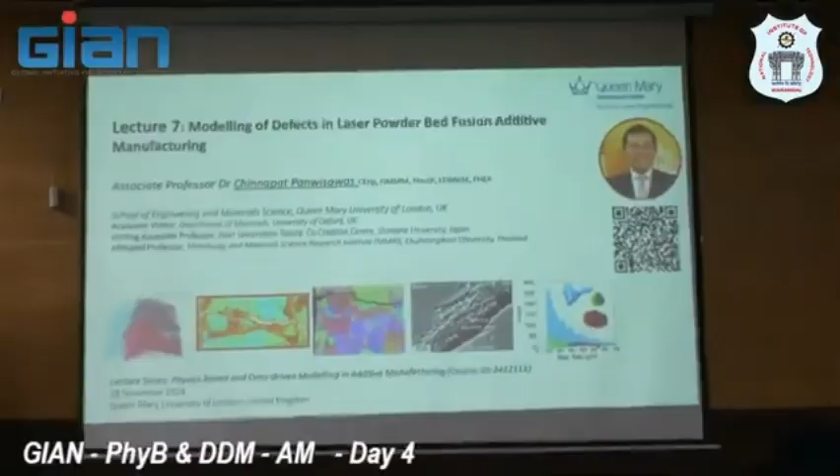Yes, we have about 3 minutes, so wait for about 3 more minutes before we start the first session. I hope everyone is not too exhausted about yesterday's trip. Thank you very much, Professor Kumar, for the arrangement and everything, it was very enjoyable. This session on your schedule looks the same as another, but it's actually not. We are talking about this topic first before a specific example on the nickel-based superalloy.

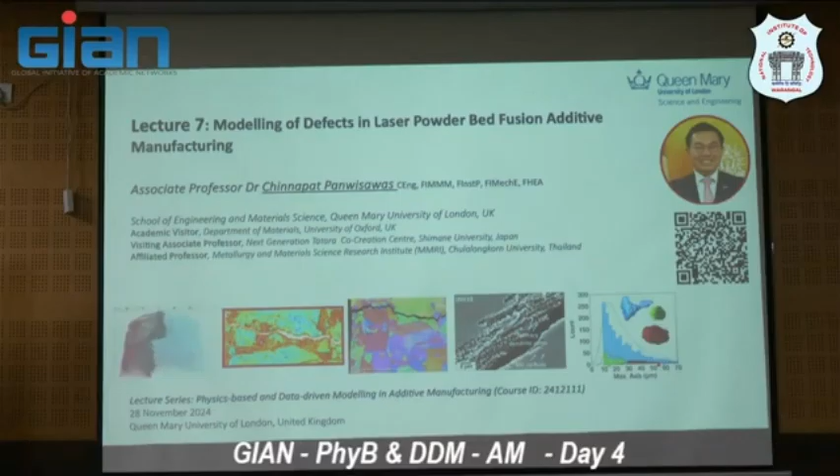Standing here. Is that in the frame, right? Okay. Yes. Okay.

I think we can leave it until the question answer session, because another slide is very metallurgy actually. I may need to spend some time, or I will be very quick, so we have some long time for discussion. Yes, I think it's about time to start.

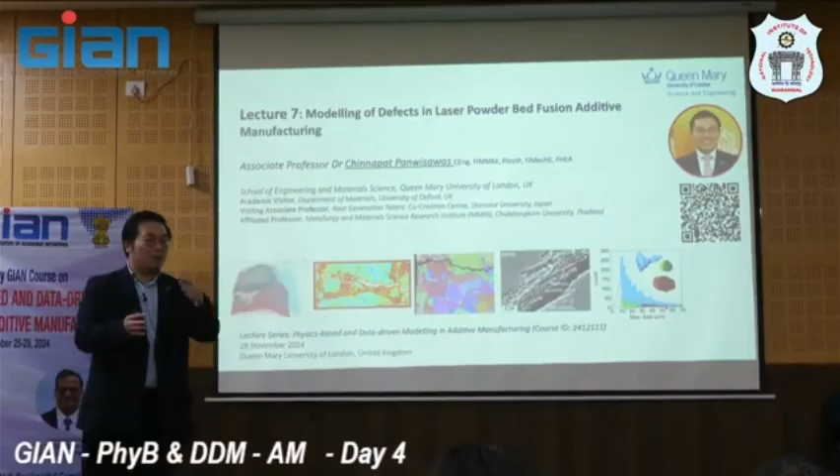Just to let you know, on your schedule you have a similar topic for these two morning sessions, but there is actually a difference, because the intention is that we are approaching the end of this short course now.

Before we go to the last two topics, which is about physics-based simulation for one of the defects we call non-homogeneity in additive, in the next session we want to give you an overview of all the defects formed in additive. The last one will be the example on physics-based simulation, and the session after, tomorrow morning, will be about how we can use data-driven or machine learning approaches to design a new alloy, a success case we did over many years on nickel-based superalloy.

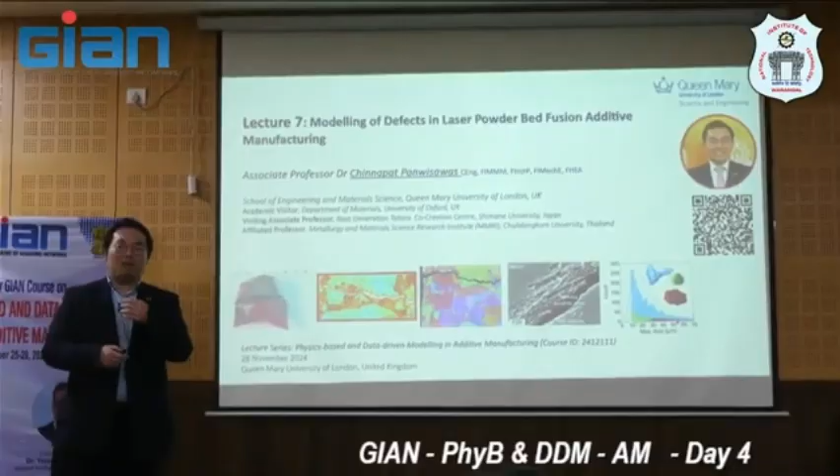So it will heavily focus on that kind of material I'm working on. Today is about defect formation and defect type in additive manufacturing. As you may know, defects are always a problem for engineers, metallurgists, and everyone. No one wants defects on their printed part, but unfortunately nature is not that simple. You need to deal with it somehow, and most importantly, as an engineer or scientist, we need to understand why it happens and how we can avoid it if at all possible.

As you know, this is the very first slide I presented, that we know now about the processing, microstructure, and mechanical property, and defects which can happen across this entire PSP pathway, what we call property-structure-processing-structure-property pathway that we are going through. This is smaller scale, this is bigger, this is a crack across the build, which we will talk more about.

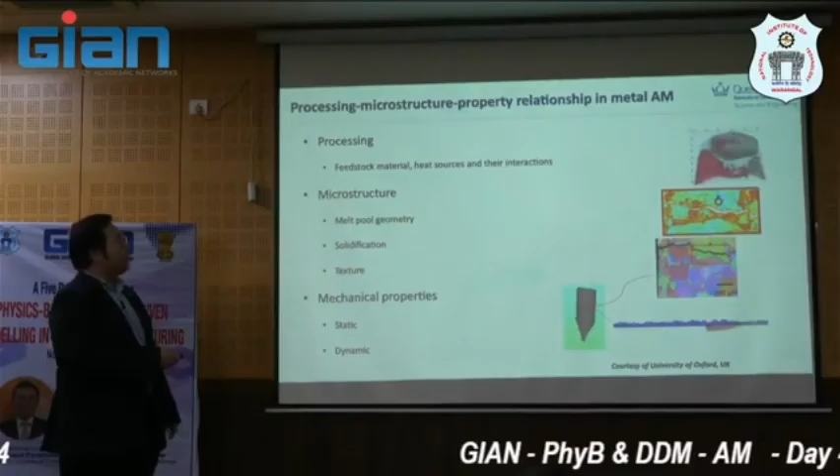And then you see when we do the EBSD map here, you see the strain which is not homogeneous anymore. This is what we found after we did some atom probe tomography. But anyway, this is the defect thing we are trying to talk about today.

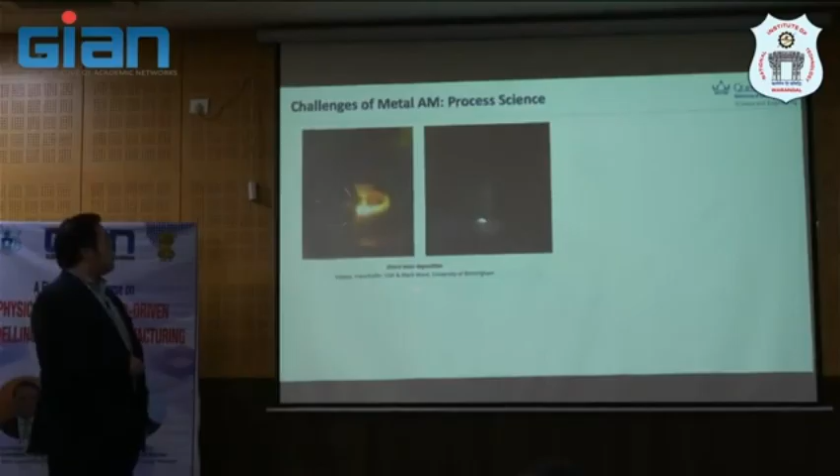Just to remind again, in order to successfully print something in additive, we understand from the root cause of that, the laser-matter interaction with the defect. This is during processing, not solidified yet, and you see a lot of things going on here.

I'll try to bring you to the chart that shows easily what happened here. It's so dynamic, you see the plume coming out and sometimes spattering and so on. How can we predict that? That is another question.

This one is probably similar in manner, you see some plume coming out as well, but probably not as strong as in this case. And this is a bigger length scale.

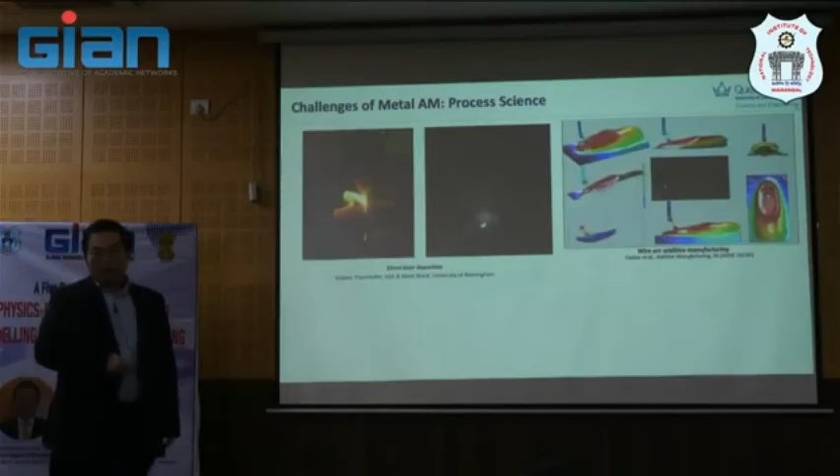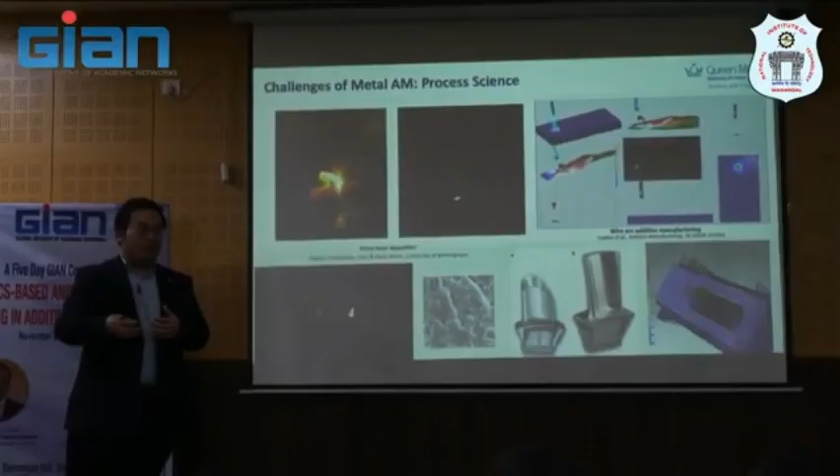So the question is, how can we systematically classify these defects and try to understand them in a single, common language? There is a good paper that reviews what is actually multi-scale defect in powder-bed fusion additively manufactured metal and alloy. This is a classification of multi-scale defects in powder-bed fusion, LPBF if you like, though it doesn't need to be LPBF, it can be electron beam powder bed as well. You will see from here that they classify defects into three categories.

One defect type is actually related to geometry, which is part distortion. This is a classic kind of cantilever feature. It's similar to a case study of AM Bench at a NIST National Lab, which will be a bridge structure with different sizes of fins, showing delamination related to geometry because of the distortion or residual stress build up in the part.

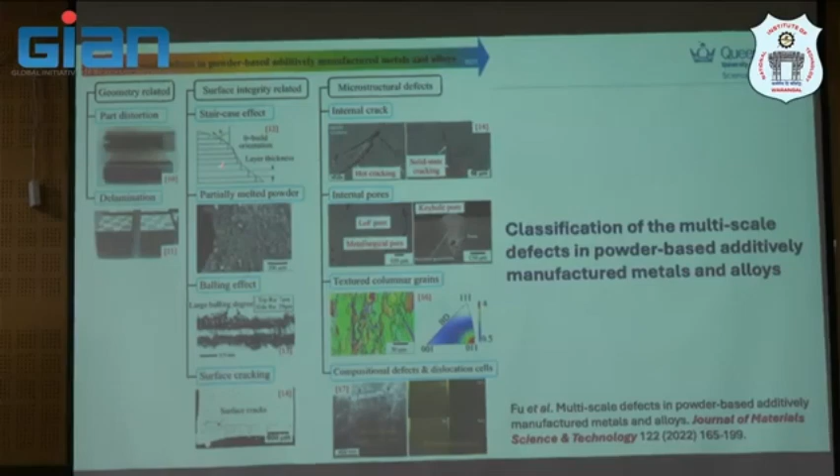Another defect type is surface integrity related, kind of a staircase effect, probably based on geometry as well, but focused more on the surface level, which relates to layer thickness. Sometimes due to melting you get partially melted particle or powder, and as melting progresses, you get a balling effect, which is a surface tension kind of phenomenon related to thermofluid interaction.

And this is surface cracking. This is one of our works published in ACTA 2021, and this is from the same work here. So we talk about hot cracking. I will tell you a little bit more about these cases, that cracking is not just...

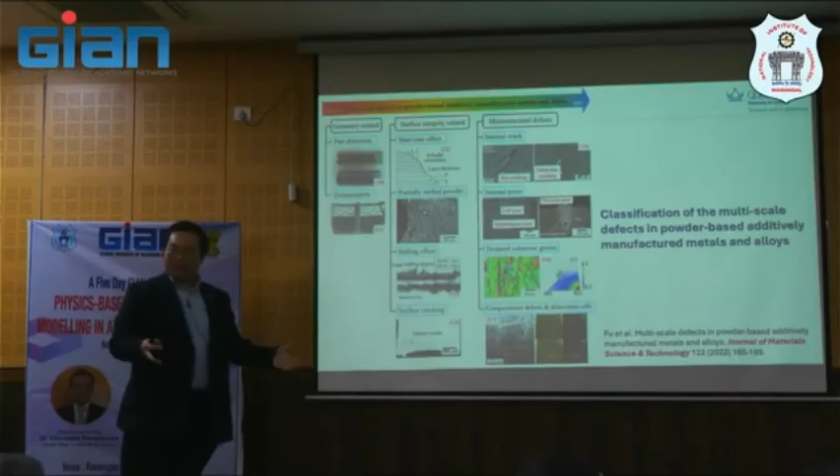Here as a microstructure defect, porosity is also classified in a number of ways - lack of fusion, voids, process-induced porosity, and also coming from pore trapping during powder production. Texture and columnar grains are defined as defects since textured material is not preferred in the process. Last but not least, there's compositional defects, which I'll give an example of next lecture, and dislocation cells called cellular structure in additive manufacturing.

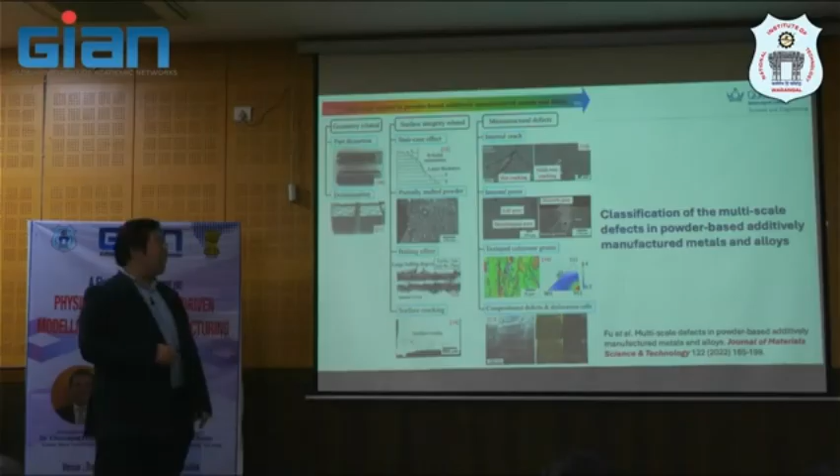I hope this summarizes what we discussed in the past few days. So this is the geometry-related defect, more detail or example here. Like this bridge structure at numbers 1, 2, 3, 4, you see some bending of the part. If you look closely, there will be differences in terms of the size of the small part here, and then there is some delamination.

As you remember from one simulation we did, if you print something long enough, you introduce some intrinsic heat treatment, which allows a secondary phase to grow. That concentration may lead to delamination sometimes because the stress is not continuous throughout the sample, and this may relate to distortion as well.

This is a bigger part that may induce geometry-related defects. People are trying to correct, study, or systematically investigate how feature thickness contributes to geometrical error, as I showed in the last two slides, comparing the CAD model and the printed model to see the mismatch. The error is actually quite significant, up to 35% mismatch or deviation from the geometry we want to print.

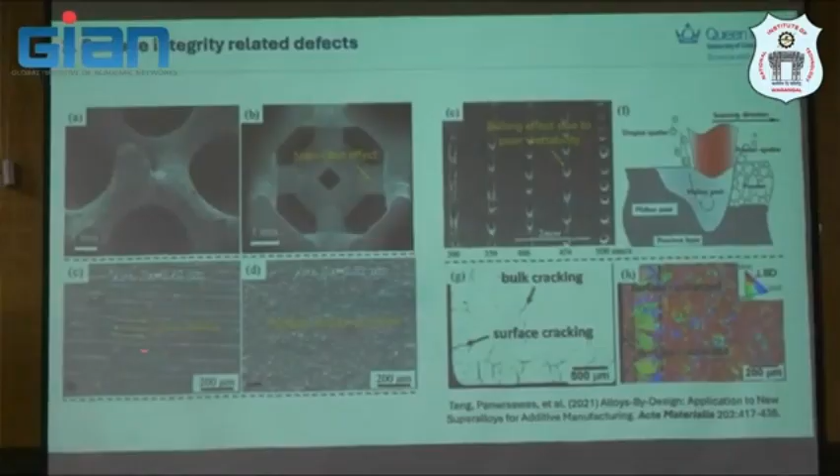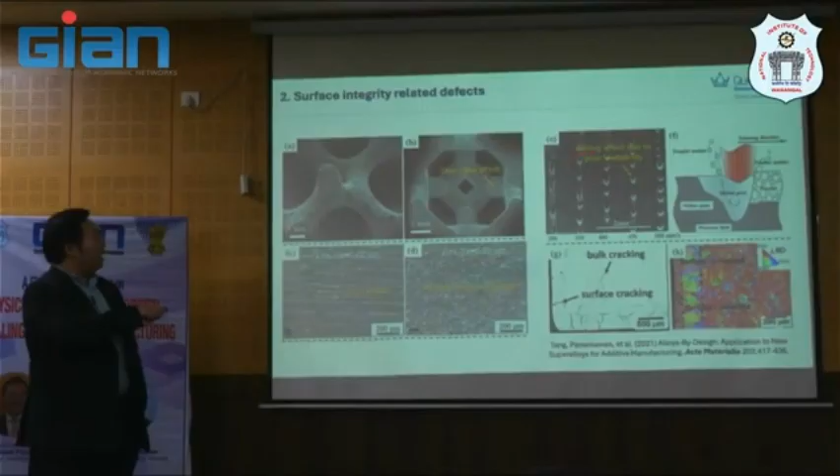The surface roughness may contribute from the quality of the powder as well as the way you print it, in terms of optimized process conditions like laser scan speed and the power used for this process. Partially melted particle or powder is also another defect which may pose challenges, and later this may form porosity. All of these, and almost everything here, originates during the laser-matter interaction.

You see the balling effect is about poor wettability related to surface tension and probably viscosity of the metal at the liquid stage that you print. This is an attempt to summarize it, but it's not very inclusive like my previous diagram.

Definitely this will be another challenge, because in terms of surface integrity it's not just porosity, but cracking at different locations. At the edge, it's due to rapid cooling, which is different from in the bulk.

This sample is only 10 millimeters thick. It's not very big, but there's still some micro crack and then macro cracking here. I think this is related to the scanning pattern we use, because at the edge and in the middle we change the way we print it. So that is something to improve.

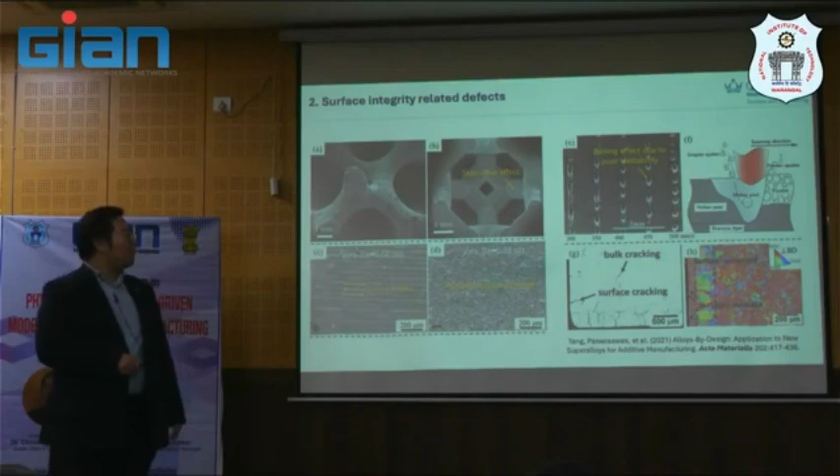But the point I'll show later is actually related to the composition of the material, which probably relates to this effect as well. There's surface cracking that connects from the bulk to the surface, and the microstructure in the middle and at the edge are different - it looks like the growth rate here is more epitaxial, or a columnar grain, which we'll talk about more later. So this is surface integrity defect.

In terms of microstructure defect, there are so many microstructures that link to composition and to the processing as well. But again, this is the internal crack - basically a solid mechanics kind of effect, solidification cracking.

Why do we say solidification cracking? Because there's evidence of small dendrites. Be aware this scale is just half a micron, so it's so thin you probably wouldn't notice it as a dendrite - only primary arms are actually taking place here. You see the crack feature, and then zoom in using very high resolution SEM, and you'll see this kind of dendritic structure.

But it's not just solidification cracking. As I said, there will be other types like liquation cracking, and carbide cracking as well - something we want to talk about more in detail. Then porosity, again classified as internal pores, probably acts as a stress concentrator, inducing some plasticity in this zone, promoting crack penetration. This is another scale of solidification cracking, at the melt pool scale.

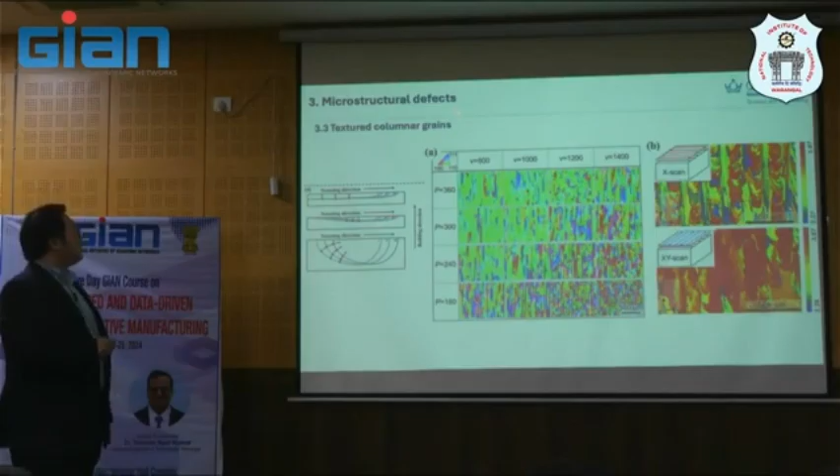Everything originates from here. So the next one is the microstructure defect: texture, columnar grains - one of the microstructure defects. You'll see this diagram clearly when you use P and V. The microstructure changes quite significantly under certain conditions - let's compare here and here.

You will see they are so different in microstructure, and this also contributes to the different scanning pattern that you use. If you use only X scan here, you get this microstructure.

But if you use X and Y, kind of alternated layer, X, Y, X, Y, this will lead to a different, more probably not preferable microstructure. We want more equiaxed, small, round shaped microstructure that we need.

As I said, this is related to the thermal model as well. If you scan like this, microstructure will grow this way, so we can control the directional growth of the material. But if you scan like this, the microstructure may start to bend a little bit.

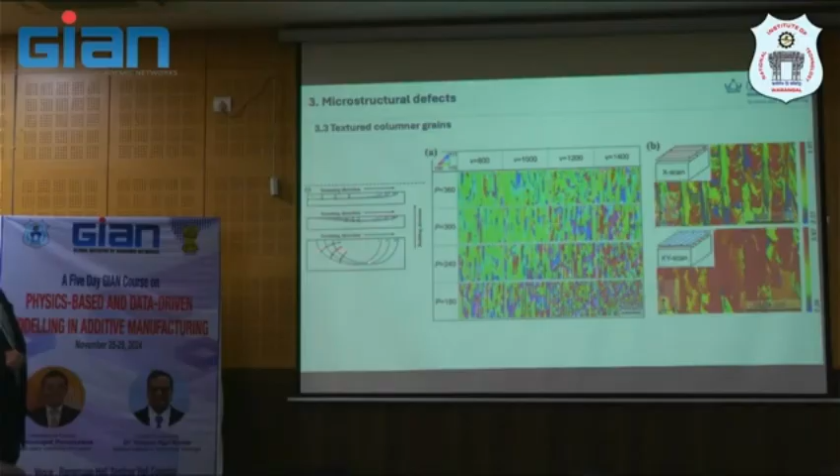But if your scan direction makes this melt pool very hemisphere-like, the grain will grow in this direction. That's how you see some feature like this in the melt pool, for example.

So we will talk a little bit more. I think this one is probably not talked about a lot these days, but people start to study compositional defects. What I meant by that is you may get some segregation, probably heavily during the printing process, and this is not easily detected, and also needs advanced characterization to look at.

This is a cellular structure of LPBF stainless steel 316L, a commonly used steel for 3D printing. You see the suggested microsegregation in overlap to the dislocation cell.

Sorry, this will go deep into metallurgy, but it's quite interesting science where we can look at grain boundary. This actually decorates at that location, and this is because of the formation of dislocation cells at that condition.

This is trying to calculate this at the conditions of selective laser melting and direct energy deposition in one-dimensional, two-dimensional, and three-dimensional structures. You will see some characteristics of DED and LPBF are a bit different, due to LPBF scanning in a very small, precise region rather than DED's large melt pool.

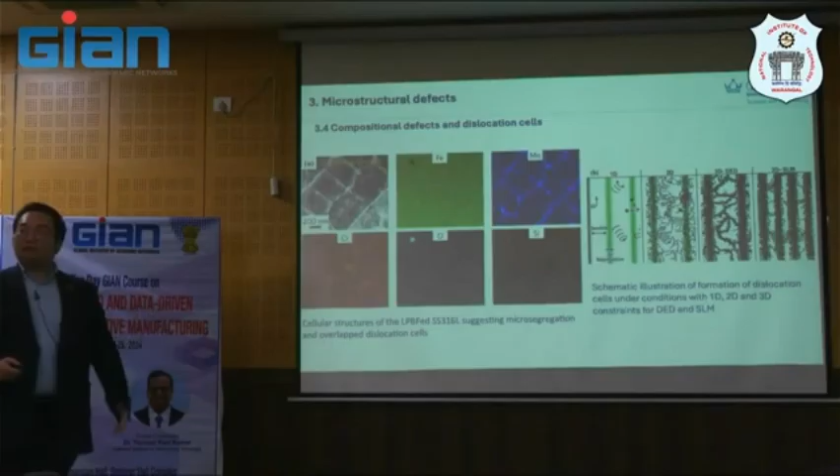Or even with LPBF laser and EBPBF, which is electron beam, you get different dislocation cell or microstructure as well. We haven't touched much onto that, this is getting into metallurgy now, but I just wanted to mention it. So how can we detect and also predict it?

This is another question for the talk today. So the defect here, you see detection of this. Distortion actually is not easy, and this is related to the length scale.

If you like, this is a large length scale, component length scale. It's related to solid mechanics. It's related to mechanical engineers like yourself to help simulate it at the part scale.

But actually, using homogenization that does not contain some microstructure information may not correctly capture what happened during the 3D printing process, because the case in 3D printing is not homogeneous across the structure.

You need to introduce some way, somehow a computational approach like statistical finite element calculation rather than more deterministic. You need to introduce some framework that they call statistical FEM.

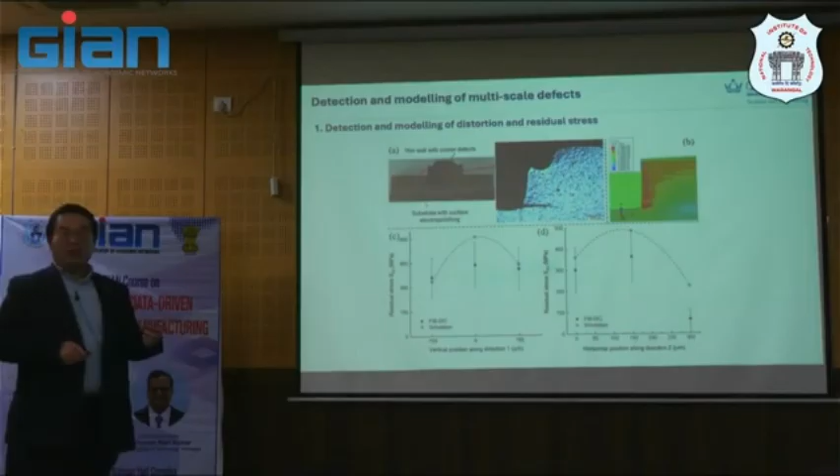Another one they're looking at is a more rapid type from numerical, computational mechanics - it's meshless, so you don't need to use mesh and then try to predict this part. Again, it's not my area, but you're welcome to study more in this topic, which is interesting as well.

So you will see the residual stress in the principal direction as sigma or S33 at different directions or conditions. That means at different locations, you get different residual stress profiles, which make things even more complicated. But this is life, so basically complicated.

And then next is predicted or detection - the detection of the surface roughness. If your printed sample is in micro LPBF, and then this is for implant, for example, or thin film, you may use AFM, which is atomic force microscope, to detect or measure it.

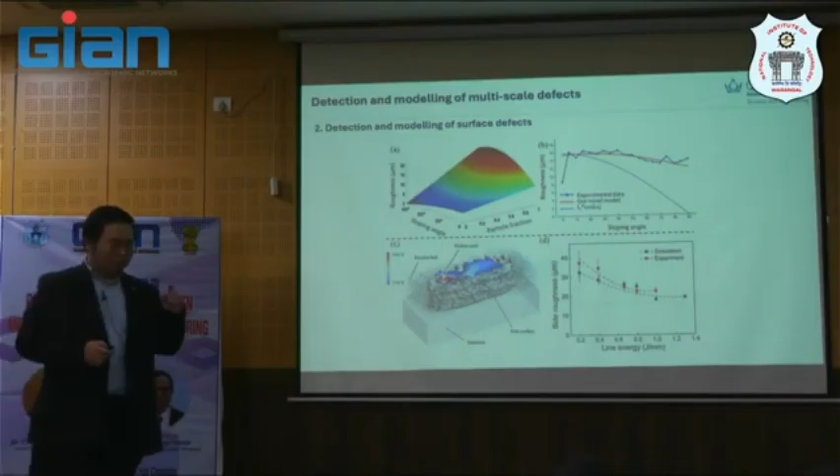Or if it's large scale, it may be some kind of laser measurement. Previously my colleague that I collaborate with also used some microscope to roughly estimate. They measured RA quite well actually, but I have to go back to see the information on how they did it. Anyway, this is some detection of the surface roughness, and the model also can try to predict what happened.

In this case, some of you asked me before about how can we predict the side surface here, and some model actually has been done in a multi-layer fashion, but you will see here is about only 5 layers, but they can already capture the trend, at least qualitatively.

I think this is quite good agreement with experimentally measured roughness here, even with very line energy density. But anyway, that means things need to be improved a little bit more.

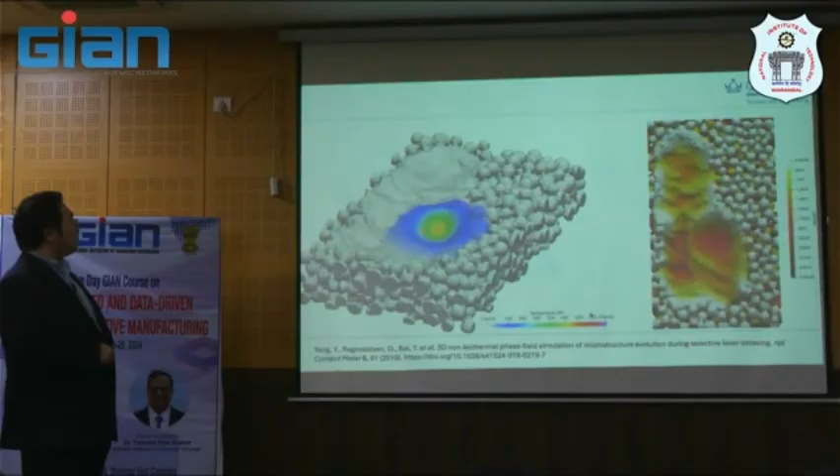Another example is related to this evolution, but this isn't really intended to be melting, it's just a sintered part. So you see, if you scan these three tracks and try to predict the evolution of the microstructure in terms of porosity, this is what you get.

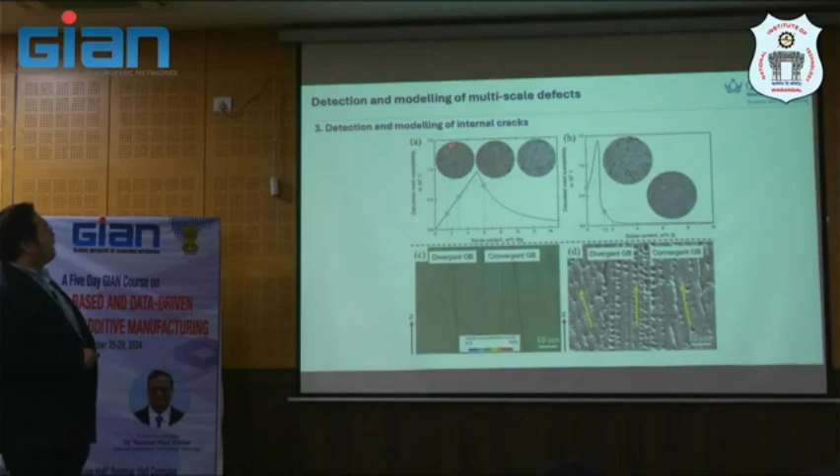Next is about internal crack, again related more to the solidification feature. The cracking actually depends on this calculated crack susceptibility. This calculation depends on the solute content, meaning it depends on the elemental profile within your metallic sample, since we're talking about metal. Solute content at different conditions will vary as well, and this leads to different structure and defects.

Again, this you can do in terms of simulation, as Hong Hao showed very well yesterday, predicting the dendritic growth and segregation profile. I can say it's not an easy task, but it gives you insight that may not be easy to measure experimentally.

Next is related to what we talked about in the past few days - the microstructure. People try to predict or model this grain structure a lot. This is work from Professor Wentao Yan at NUS, published in NPJ Computational Materials. You see multi-layer deposition and capture of the columnar growth here.

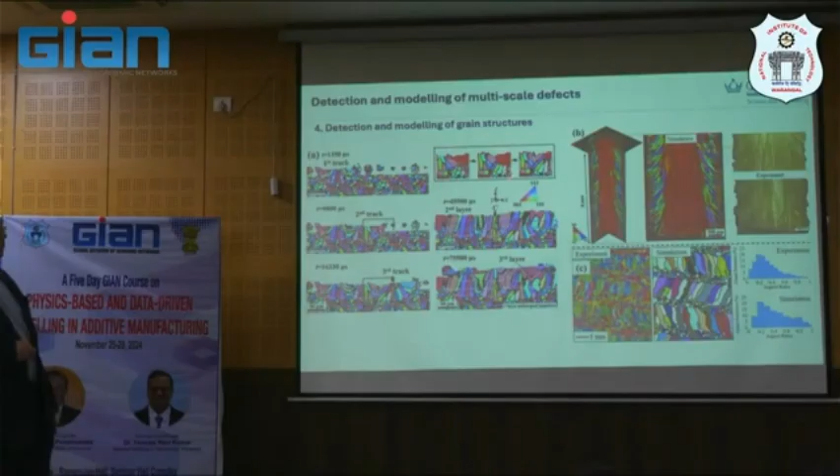At the same time, if I'm not mistaken, this is from another group in Germany. You'll see more directional growth here. Even though this isn't single crystal yet, this may be from electron beam melting, and the experiment and simulation are in quite good agreement.

Or a very traditional kind of microstructure that you'd see at the beginning of AM research in metals. You'll see bands of equiaxed and columnar structure. I think this is due to the melt pool, which wasn't very well understood at that time, leading to this kind of phenomenon.

I mean, a zigzag pattern, if you like. Some structures are very zigzag, and that's why you see quite beautiful microstructure. I'm not sure if it's usable or not, but it's this beautiful structure that can be created by AM.

All in all, what I want to say from this kind of work is about the statistics you extract and then try to predict. I think this is an important message - whether or not you can generate enough statistics that capture the characteristic of the process.

In this case, they try to extract the grain size profile, the grain size distribution, the grain shape - one means near-equiaxed, and if you go to zero, it's more columnar. So this is a distribution here.

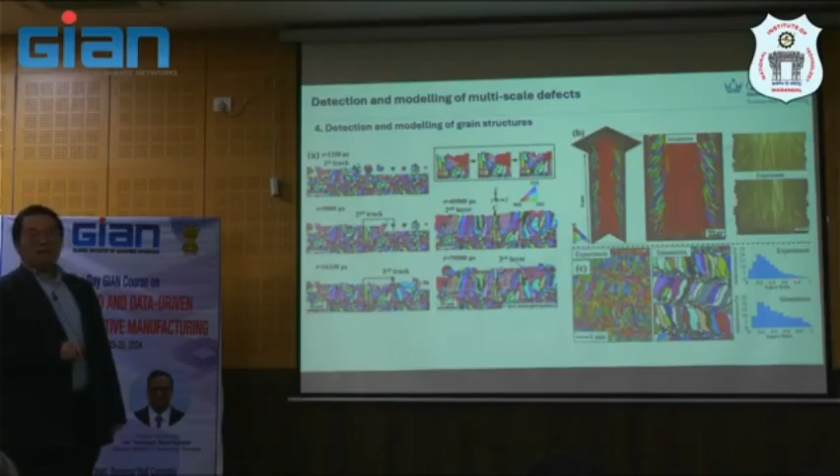This is more columnar grain, which is actually the same as what's observed experimentally. So simulation and experiment probably tell similar things. It's quite good agreement that they can predict the distribution or statistics of the microstructure here.

Next is about how we can model microsegregation, which we showed a lot yesterday on the dendritic growth and segregation profile. This is not artifact - it's real, induced by the process, and we'll have an insightful example in the metallurgy of nickel-based superalloy in the next lecture.

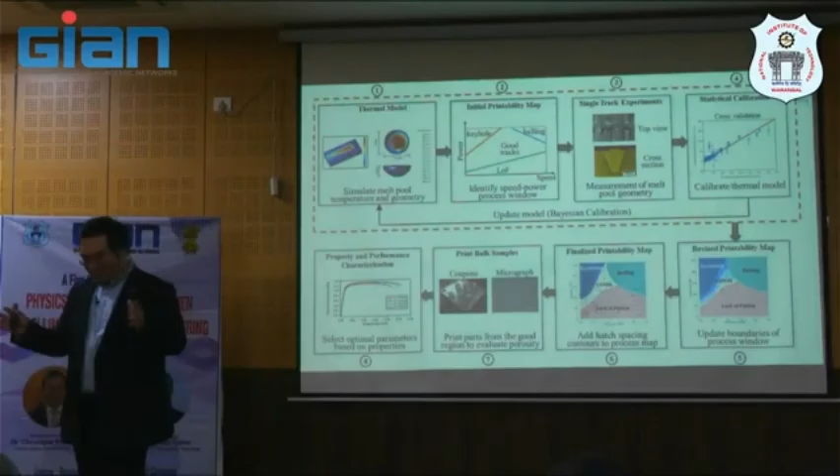I mean, under fatigue, some group in the US has been looking at this very thoroughly, I think, in this dislocation cell for additive manufacturing. Yeah, this is just to summarize the first class about classification of defects that we are looking at.

From the thermal model, you'll see there's some calibration, meaning this may be a framework to reduce the defect. So we start from the melt pool geometry, the printability map we showed previously, and then link to the experiment, statistical calibration. This component is important because this information will go into training the model. We want to extract statistics, train it back, and then hope to revise and finalize the process map, print something, and improve the performance of the material. So in this cycle, we need not only a computational framework but also experimental effort to make this kind of closed loop control happen.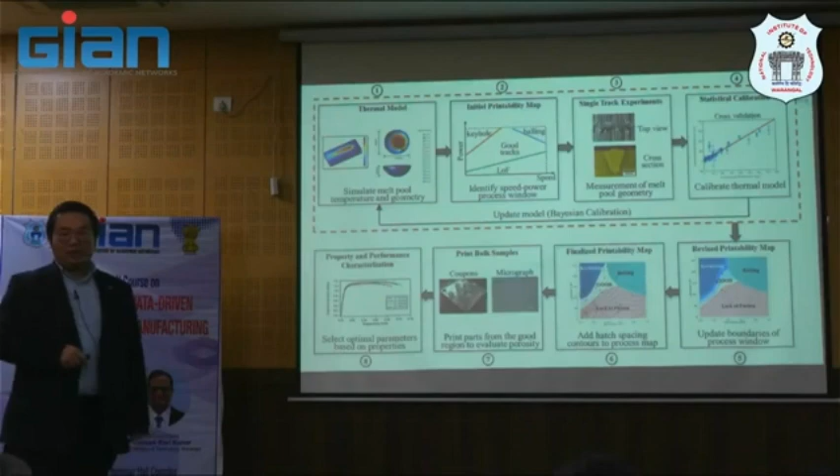So I think that is pretty much the aim or the goal for every company, university, research group, and everyone, I believe.

First, the case I want to show you, why I put data-driven first, is because this will use some kind of data-driven framework to classify the defects in additive manufacturing material as well. This was published a few years ago in Nature Communications, on extraction of defect classification in metal additive manufacturing. They use titanium 6-4 to classify here.

They use an automated XCT. If I remember correctly, there are about 3,000 or 4,000 samples that they classify. This gives you statistics from this feature. There are three important features to notice.

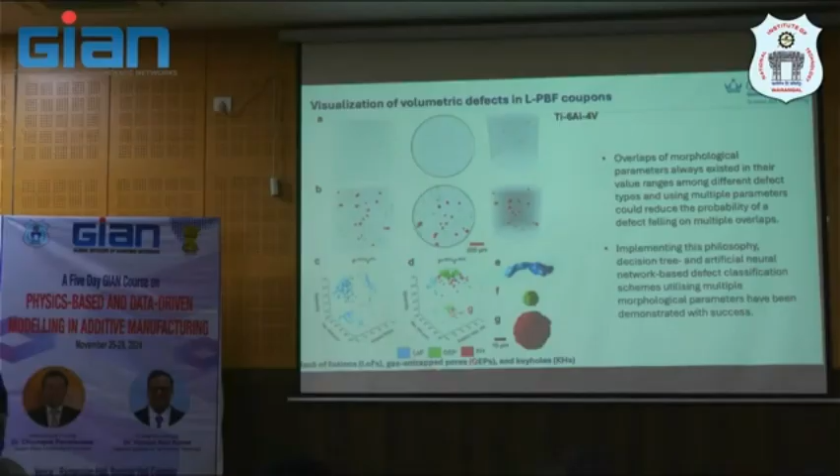The first one is lack of fusion, which appears elongated, from the XCT. Then there's gas entrapment porosity, which is smaller pores, possibly from atomization, small pores in the powder. The next one is keyhole or process-induced porosity, bigger size. We're talking sizes of about 10 microns up to 20, 30 microns.

Then they try to classify and map, because from the aspect ratio you can basically classify the type of porosity. On the color code, rounded small pores are green, big size is red. Green means probably okay, not too harmful, but red is very harmful, too big. The elongated type is somewhere in between, with some overlapping in the morphology parameters, because sometimes you cannot cluster this very well.

But what they did is this: if you look at different samples, this is a distribution you may get from the classification. You see the dominant porosity is actually lack of fusion, in blue and light blue. Keyhole porosity is quite minimal in the samples they investigated, across 9 samples. Then there's an intermediate amount, which is gas entrapment porosity.

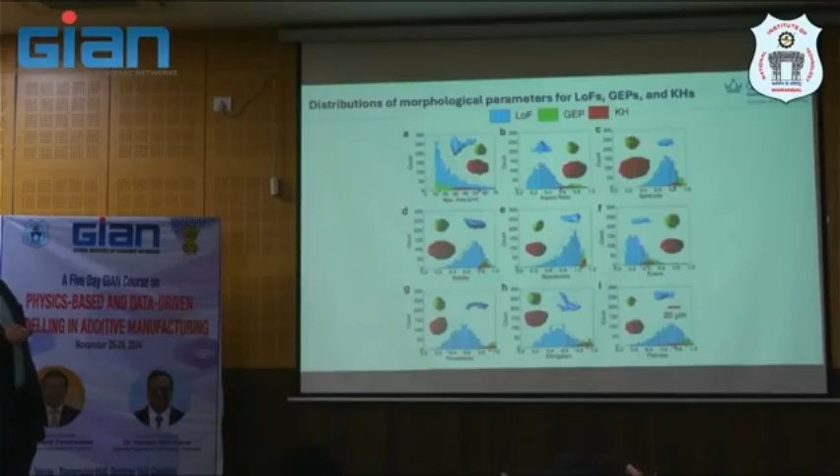So this paper is quite interesting and shows a good way to do data-driven analysis with data from XCT, which is experimental. It's heavily coupled between experiment and coding. Then what they do later is rank the morphology parameters to understand the extent of overlap between them.

Sphericity, which is about the shape factor, sparseness, extent, solidity, aspect ratio, elongation — these are the geometry factors that they are looking at.

So basically talking about the porosity only: what is the overlap between gas trap porosity and keyhole, gas trap porosity and lack of fusion, lack of fusion and keyhole. There will be some overlapping, but this is something they try to rank in a pairwise manner to understand the overlapping percentage between each pair of porosity. I think this is a good and quite clever statistical approach they use to extract statistics for this titanium 6-4 process.

So later, it's quite impressive again — they implement a decision tree for defect classification, and you'll see they achieve about 98.8% accuracy on the test data. That's based on, if I remember correctly, thousands of data points — about 3,000 data or CT scans that they used.

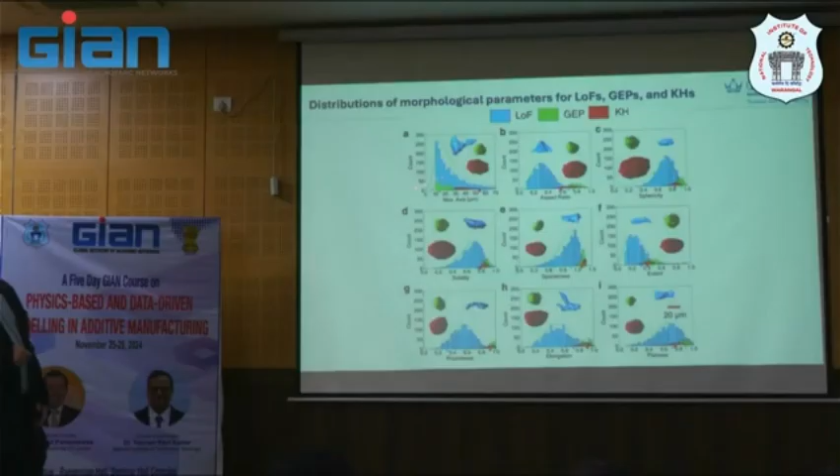But I don't think we can actually remove every porosity from your part, it's about understanding. You may not prefer this porosity profile for sure, but one with a very minimum kind of distribution, maximum frequency here, minimum frequency here, may be acceptable for the application we need. So I think this is quite a clever way to have this systematic classification by artificial neural network.

So next one is related more to what I have done. The scale previously was in the porosity scale. Now I'll bring up the scale a little bit to the crack scale, which is a little bit larger than the previous one. So I just want to summarize.

This is from our recent paper last year in Additive Manufacturing. Just to summarize, you'll see this thermal signature curve several times now, but I hope you're familiar with it. We try to summarize the defects formed during additive manufacturing at different thermal stages. From the argon atomization, you may get entrapped gas porosity as well.

Pre-alloy may introduce some compositional defect here. And then when you go to the powder bed fusion with intrinsic heat treatment, you may get different ingrained cellular structure, and also dendritic and solute trapping cellular structure here.

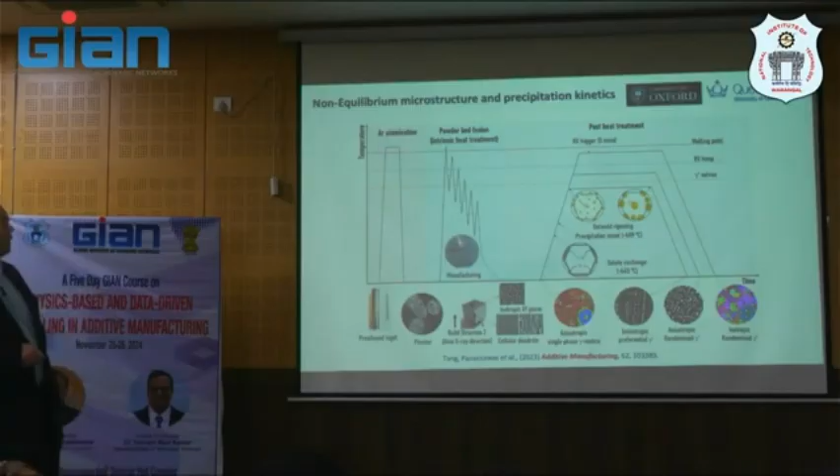There's some anisotropy, which is actually happening in the preferential gamma prime, and anisotropic randomized gamma prime can happen in the post treatment. You want to get to the isotropic gamma prime distribution at the end because you want a more homogenized structure for the property and material life at the end.

So this is just summarized, but we are talking about the possible solid state defect, which is a bigger length scale, but not too big. In this complex nickel-based superalloy, you will see that we get a kind of strain-age crack here.

I'm not sure you can see this one, but it's related to a very tiny gamma prime particle that decorates around that crack. We also have stationary cracking that transmits across the melt pool, and probably it stopped at the solute trapping zone. I think this is another topic I want to emphasize next lecture and tomorrow.

You'll see how science and metallurgy can probably give insight into the kind of defect formation. You may get some liquation during 3D printing, where a liquid film is formed during subsequent solidification, and this is not a new thing. It happens as well in casting, but in 3D printing it's commonly found a lot.

But no one really knows this one. If they're not a very good metallurgist, they may not realize this is liquation cracking, something like that. It's related to incomplete solidification, leaving behind some liquid film inside, and that is a weak part for the cracking. And actually, another one is solidification cracking.

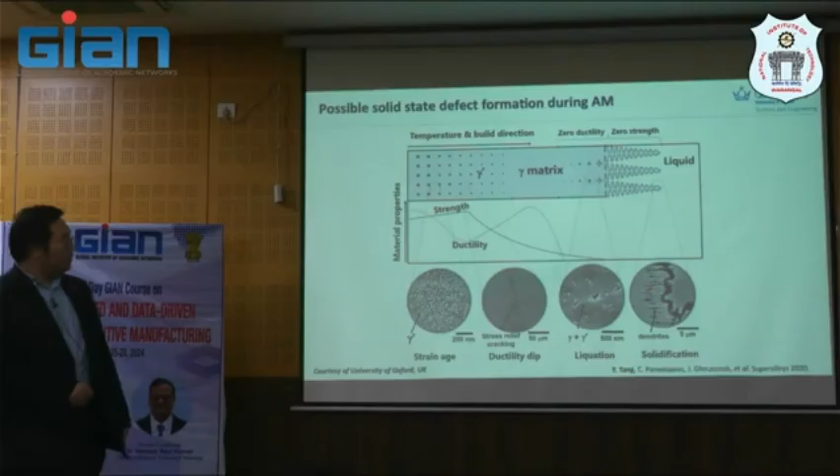Tony Tang, who is my previous postdoc and now assistant professor at University of Birmingham, has done this very well.

What we did next is try to systematically investigate the crack present during 3D printing in four nickel-based superalloys. If you remember, we introduced two new nickel-based superalloys, ABD series, ABD 900 and ABD 850, and then compared with Inconel 939 and CM247.

We printed a 10 by 10 millimeter cube using this scanning pattern, and then we rotate by the factor of pi, so 67 degrees for the scanning pattern, and then we evaluate the crack for each material.

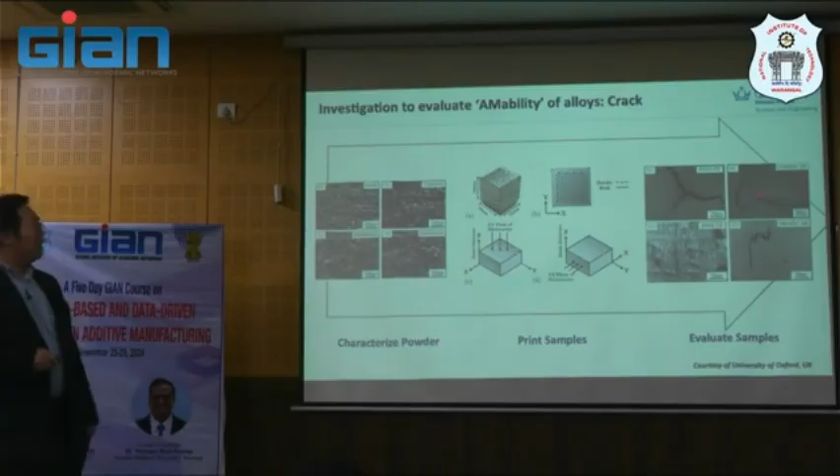Each nickel-based superalloy material - what we found is that the crack actually takes place at different location and occasion. What does that mean?

If people have some bias on the characterization of the 3D printed sample, they usually take and select only the good area without crack and publish it. But we think this is not good for machine learning later, because the data we collect from literature will be biased.

What we did is actually map using a mosaic kind of approach from OM, optical micrograph, SEM, to map across this 10 by 10 millimeter. It's a huge area - not usually do people do this.

But that is what we found - the crack at the edge related to, I would say, different heat transfer coefficients between the edge and the bulk, and that means you get different structure. But anyway, at the edge, in the bulk, we call it micro and macro cracking here.

And this is what we'll see - that is why we always show at the edge. You'll see this is 2 millimeters, quite a large area. Actually we show you here - this is basically the whole sample, so you can get an overview, the map of the crack.

What we do next is compare with the newly designed alloy here - there's no crack or very minimum crack, we will show you some statistics later. So this, you will get some lack of fusion porosity in this type of thing, which means it's related more to process parameter optimization rather than other issues.

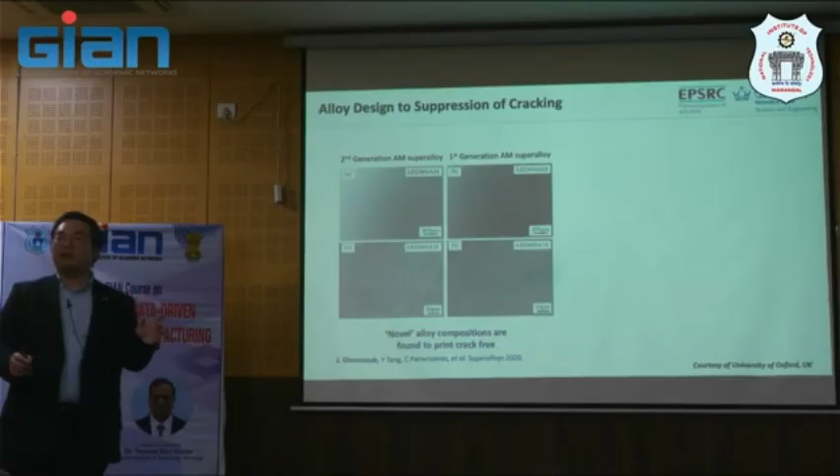But what is actually happening here? They expect to have about 25 to 35% gamma prime, but it prints as a solid solution. It's a solid solution, I can show you in the next lecture. It's proved by so many means of experiment. It's solid solution. But that's what I said to you: we print soft, and then we recover the strength later.

This is what it does. So previously, if you just use hardness, it's actually quite soft during printing, especially here. But you can recover the strength back with one single heat treatment cycle, precipitating out the secondary phase. So this is probably something we cannot simply dream or speculate about.

It's happening here in this very systematic investigation, that the property along the build and transverse directions is actually quite similar. It's not very mismatched like others. You see, if it's very anisotropic, it will be quite different.

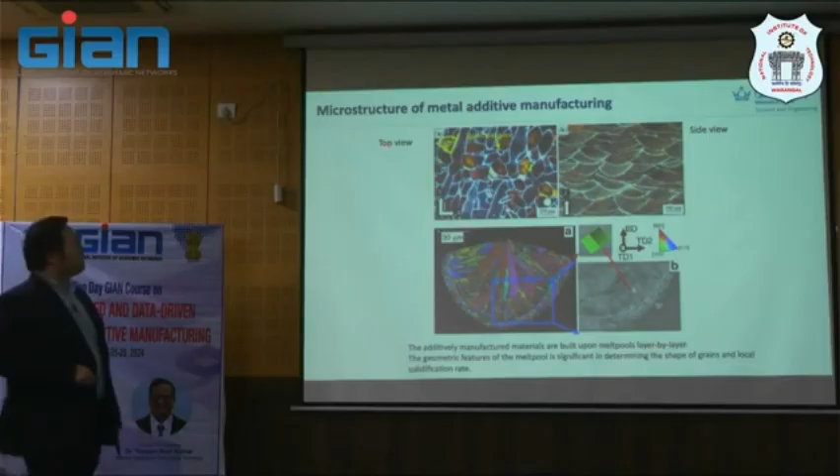Microstructure of the metal -- this is another insight, which, if I'm not mistaken, is from Nature Communications or Advanced Materials. You will see that this is just one melt pool, but they mapped it at very high resolution.

And what you will see leads to the next topic I'm going to talk about, which is macro segregation. But you will see that the melt pool boundary here is decorated by equiaxed grain, whereas the transition to columnar is going this way. So this equiaxed-columnar transition happens in this layer.

But actually, if you look at this closely, as we did, we found there is some interesting different solute or segregation profile in the melt pool boundary that we call solute trapping during rapid solidification, which we will talk more about in the next lecture.

So you will see that the microstructure across this will be different if you draw a line across. This is a scanning path related to the microstructure you see. So people now in industry try to relate this as well in the final part of the product -- how can they link the process? This shows how to link the process with the structure and property.

Clearly, yes. So this is the way we scan in this direction -- sorry, and that is the traditional, again, just to emphasize and re-emphasize, this is due to the thermal diffusivity of the metal, leading to different melt pool geometry, which leads to different structure here. As I told you before, increasing the weld speed, you get a kind of droplet shape -- the water drop shape here -- and this leads to different columnar grain microstructure.

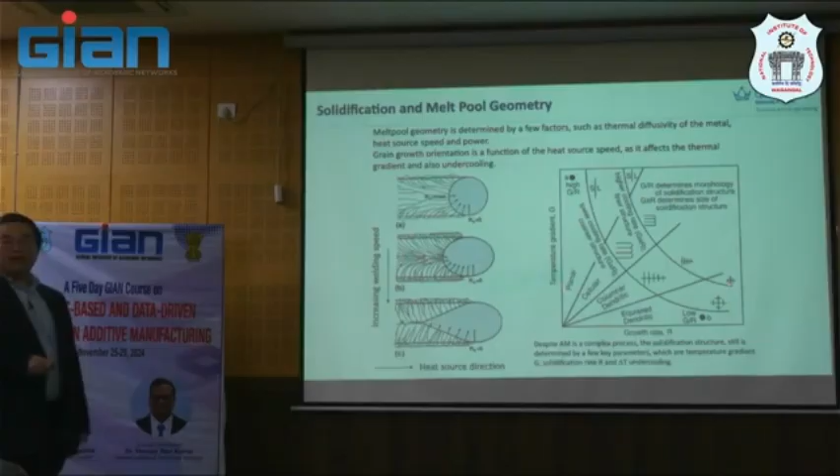This is standard solidification theory, looking at the growth rate of the grains versus the thermal gradient, where determines what zone your microstructure will fall into. But it seems that the growth rate and thermal gradient are very high. It should be in the zone of cellular and planar, not really columnar and equiaxed as we want. But this one will fall into this after some time.

It's not immediate. If you scan one track, you may see mostly cellular or planar structure. This is work that's represented in 3D, but looking at a different section that you have in this way, and this way. And then you see the microstructure at 3 different locations are different.

Evidenced by the statistical approach here, a collection of grain ID that you map onto this stereographic orientation. And then this relates as well to the process. You see different melt pool shapes.

This paper tries to relate very well that most cubic material preferred orientation is 001. And this is a strong texture direction. But this texture we call tailoring, we call it texture control in additive as well. We need to control this texture to align with what we want, because the property will follow that.

Again, this is actually not 3D printing, as one of you has pointed out, but I just want to show that we have chemical segregation, different cellular structure, grain boundaries, and also dislocation cell that maps quite well that the microstructure in AM is very hierarchical. This is the point I want to make.

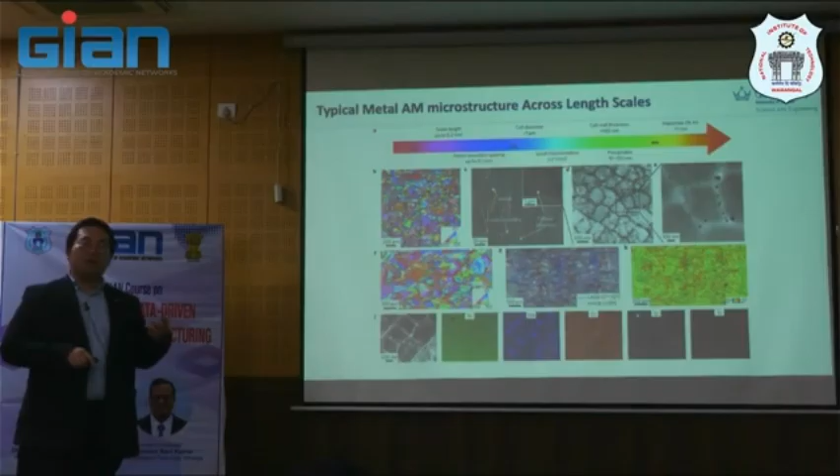We call this, there's some hierarchy in the structure that you may extract from experiment. And now modeling tries to predict that at different modeling computational frameworks, used to approach or to try to understand and predict that. Just want to show here how hierarchical ours is, you see we have one 10 by 10 by 10.

So just follow my slide. Clearly the next one, we map across this 10 by 10 by 10. And then we zoom into the corner of the 10 by 10 by 10. So this is just half a millimeter. And then we map the EBSD at this particular section in that corner.

You will see this is surface connected, and then these are columnar grains, as I mentioned before, the bulk. And then when you zoom in a little bit in the columnar grain zone, which is mostly the zone where you found a lot of cracks at the edge, right? This is something you can see.

But if you zoom in more, using high resolution EBSD, you get the map of this zone, and then you will see that in a single grain, there is a hard and a soft phase. So residual stress, type 1, type 2, type 3 can all be extracted from this kind of study.

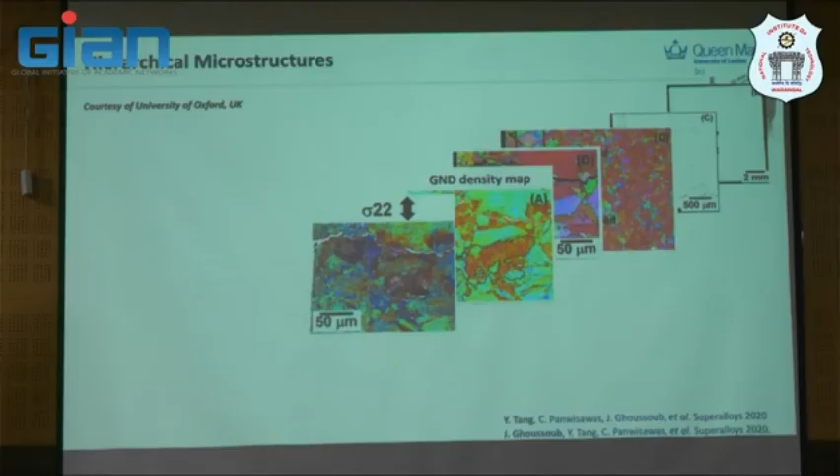So there is a softer and stronger part in one grain. And if you try to look at residual stress across the crack here, this is a profile, and this shows quite heterogeneity. And then this may relate to the microstructure.

And this is, finally, we want to control the structure. There is no doubt about it. But in order to do that, because people try to do rapid calculation...

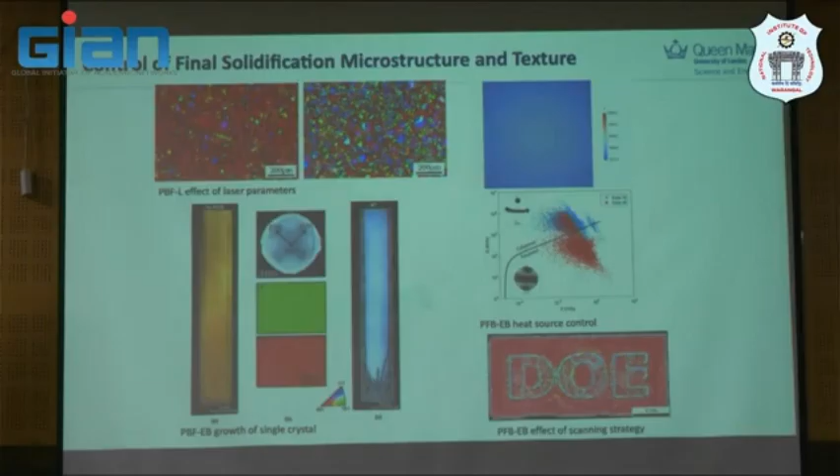And this is DOE, in USA for sure. This is just showing how fancy they can control microstructure, until you can see different grains at specific locations - that's DOE. That's what is told by this kind of beautiful color diagram. That's quite impressive because they showed this long time ago, so they know how to control this. But how can you make it in practice? That is probably another question as well. So people know and can control it.

So there's some combination of compressive stress and tensile stress in this one sample. We need to be careful, especially since scanning pattern will contribute to that as well. I mentioned four parameters now that we may need to be careful about, because the microstructure information of the sample will be so significant - we talked about defect content previously that contributes to this residual stress. I think this is proof of what I'm trying to say from an experiment point of view.

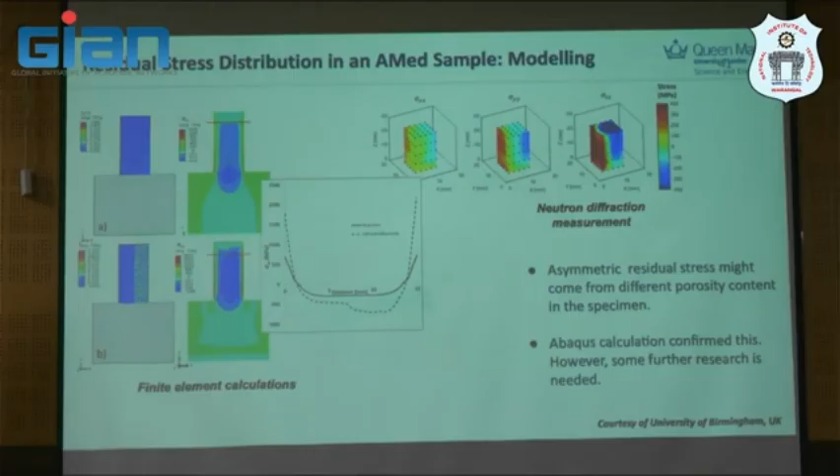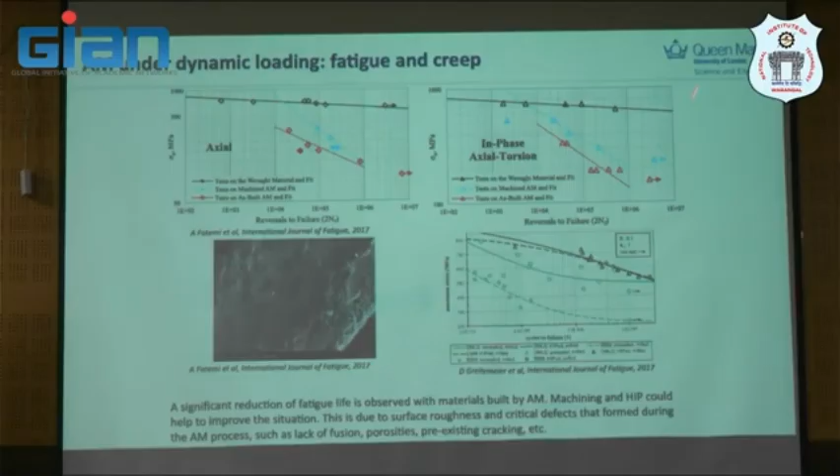If it's as-printed, I don't say the worst, but you still get about probably a million cycles of material life, but it's not as good as 100 million cycles of material life. But anyway, this is something to consider. I throw this question to the mechanical engineer to try to solve and understand. That's why the detailed microstructure is so important to dictate the life of the material in this case.

So no doubt about it. People are trying to quantify it as well, as a function of inclination. If you cast and wrought the alloy, you get the maximum creep property here. And if directional - I think if I remember correctly, kind of traditional process...

I can't remember, DA, what is this? Yes, you get property which is decreased by half already, half the creep life. But as-built and STA, this is the property. So how can we shift the property from this to the right? This is the key, and it's actually pretty much based on the crack content in your sample.

And they use - this is not atom probe, this is X-ray tomography - to quantify that. And we also do the same for our sample. But this is a cracked and uncracked sample that contributes to the creep property.

Again, fatigue creep prediction is so important, and this is so difficult, not only to model, but also expensive to measure. It's a very expensive experiment.

So I can talk a lot, but now let's move up the scale a little bit. Previously it was on the micro scale, before that in the meltpool scale. Now we move up to part scale - a little bit part scale, not very part scale - but try to predict the residual stress based upon meltpool prediction.

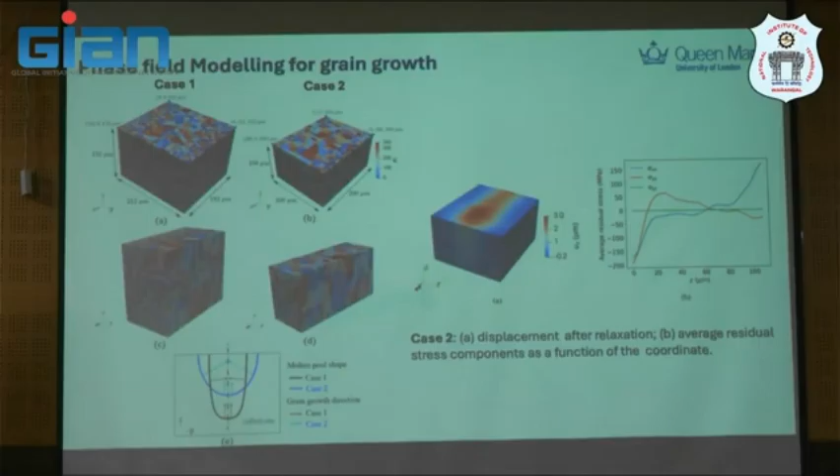Then they can calibrate the residual stress profile at the three principal directions, x, y, and z, sigma. You will see this is normalized in the z direction the same way as experiments do in neutron diffraction experiments, so they set zero along the view direction, and then see the profile in plane stress-strain condition.

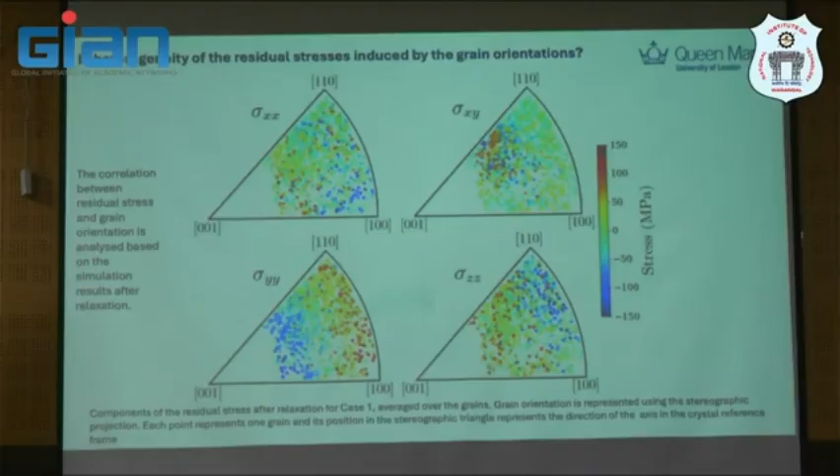And this is how they map from experiment—you see a band of soft, compressive and tensile grains, I would say, at different locations. The correlation of this may give further insight from simulation and experiment to change the practice of printing, or find some way to control grain orientation and texture, for example.

I think I just want to finish here for this one, and probably continue the second part of this in the next session, where I will show some very insightful examples about how we design nickel-based superalloys as well.

So to summarize this section on the crystal plasticity model: in the micro scale, the crystal plasticity model has been implemented for micro scale residual stress in additive manufacturing, with the thermal profile used from thermofluid simulation. It's coupled now, so you see how things transfer across—grain growth predicted by phase field grain growth, which is also coupled with the thermal fluid simulation. This simulation is validated again with in situ X-ray diffraction on AM samples. The relation between grain orientation and residual plastic deformation is revealed, which hasn't been seen like this before. With experiment alone it's probably hard, but with this approach you get basically a time resolved residual stress profile from modeling.

So high fidelity modeling is very beneficial, but at the same time it's hard to do. Having said that, I think you'll agree that the picture I'm trying to show you, up until now, near the end of the course, is so relevant—it needs to combine physics-based and data-driven approaches. One alone is not possible, so we need to work together. With only data-driven, it's not enough to get all these features. With only a physics-based model, sometimes you can survive in academia, because you're interested in scientific curiosity, working with fancy scientists around the world. But the question is: is that useful for real use? That's another question. So the better solution is to work together to get better technology for the future. Thank you very much.

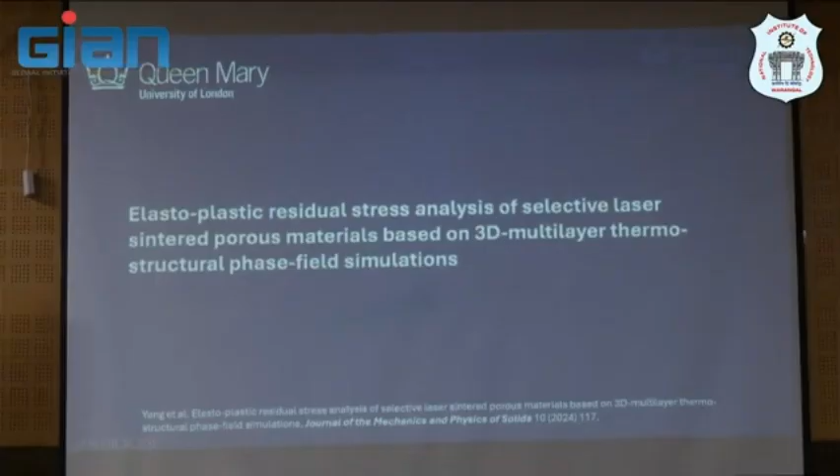We will continue from the previous lecture. Just one last example before we go moving to the microsegregation and the dendritic structure.

This is elasto-plastic residual stress analysis in sintered porous material. Again, this uses laser as a sinter, so probably this is a bit different from LPBF. The difference is this one is a diffusion-driven process, so you use laser to just sinter the material together. You leave behind porosity.

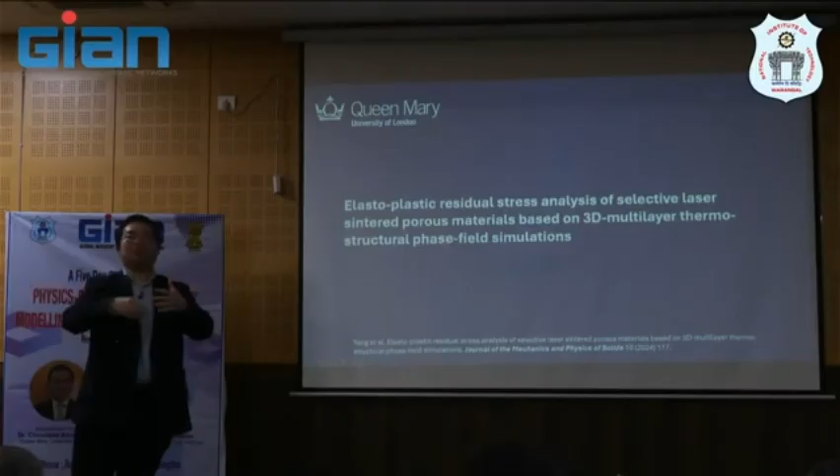The same processing technique is used for ceramic, but you don't need laser, right? Since ceramic uses electric field to do sintering or spark plasma, you use a quick electric field to basically sinter it, fusing the particles together. But here, what they do is similar to LPBF, so they have a powder bed as well, but it's cheaper in terms of the laser heat source that you use.

And then you use discrete element method here to spread the powder. After that, you use the finite element method phase field simulation to scan and sinter the powder. Then after that, you use thermoelastoplastic simulation to basically calculate the result.

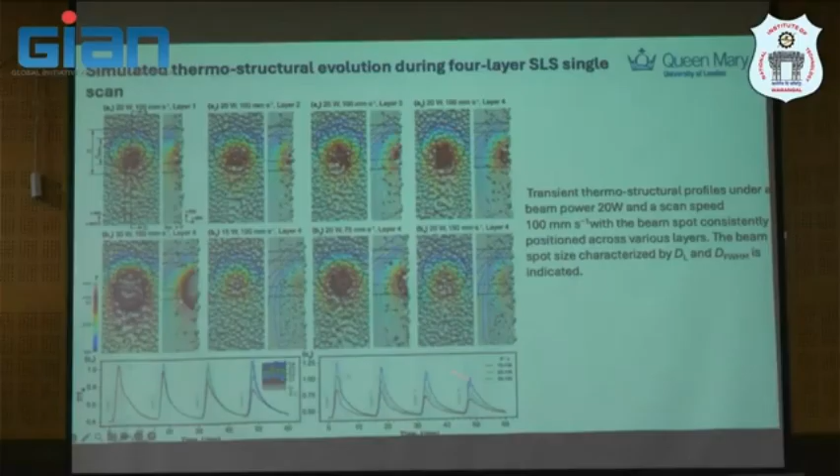So it actually dropped to about half of the melting temperature, not going to room temperature yet. What this tells us is that we can later relate this thermal field with the residual stress build-up profile. We'll see an oscillated residual stress profile based on the Von Mises stress calculation, across different layers, showing how residual stress builds up as a function of layer.

But there's something interesting we can discuss based on the processing technique here. What I want to say is that this kind of thing is becoming more and more common in the 3D printing community - using multi-scale models to gain insight. For this case, this is 4 layers, which is probably already enough to capture the characteristics of the process that may be necessary for the next scale simulation or whatever they want to use. You'll see that the residual stress profile is quite complex.

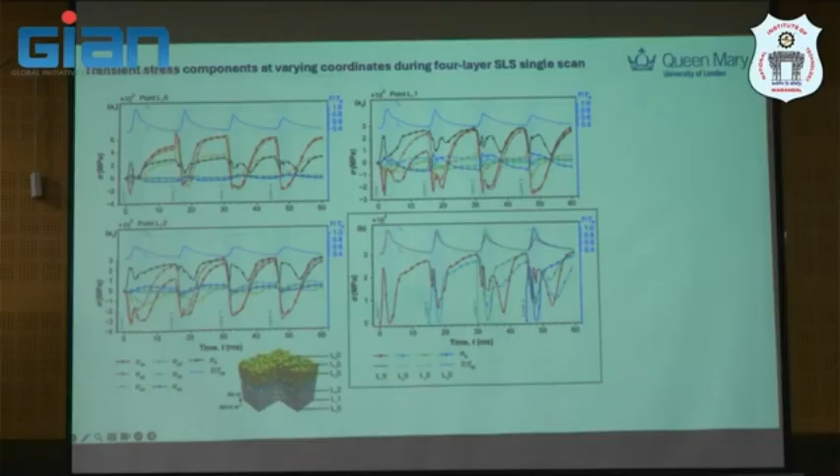And this is difficult as well from a neutron diffraction or diffractometry perspective. If you want to rotate your sample to get the shear component, it's quite hard because you need a rotating table that allows you to move to a certain angle to do that.

I believe we all agree this is the way forward that we need to go, either experimentally - an expensive way - or computationally, a little less expensive. It requires a different skill set, or probably similar now, but modeling may require more. And the reference here shows different...

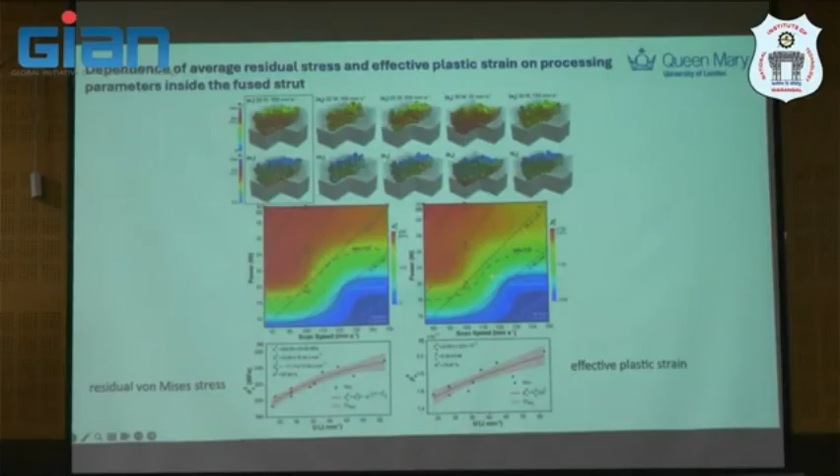And this depends on the processing condition - you'll get a different profile depending on it. So quite interesting to look at, and then understand what happened during the processing of this specific material.

Next one won't be too long - not many slides, but it's about a kind of success case that we demonstrate using simulation. This will be the last two presentations for me.

This will be the second last. First is about more physics-based modeling, multi-scale, multi-physics modeling. Another is more combination of data-driven or machine learning based alloy design combined with experiment to do ABD series material, for example. And this is actually work that

we recently published in Nature Communications on solute trapping, which will show you some insight about what we have done and what is a way forward for the community on a systematic study on a system that we believe will be important for the future in terms of compositional defect or micro segregation.

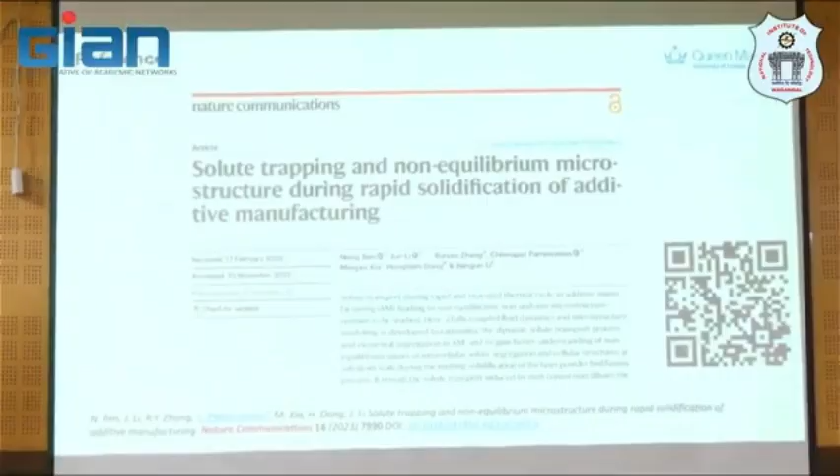So what you said is completely right, but what we are going to say here is solute trapping in our case is due to the rapid repeated thermal cycle in additive manufacturing that leads to, as many of you said, non-equilibrium, non-uniform microstructure. This is still unclear. How we try to understand this is to use the multi-scale, multi-physics model to give insight into this phenomenon, especially for nickel-based superalloy.

I think I didn't say much here about understanding the non-equilibrium nature of this intercellular solute segregation. So that means we try to resolve how this dislocation or cellular structure profile happens as well. It's a bit scientific, and I hope you enjoy it some way, somehow.

So what we are going to talk about is give you a little bit of background and motivation why we're interested in this work. You may hear enough about nickel-based superalloy, because this is my research area for a number of years, and titanium as well. So what is a typical microstructure of AM?

We'll focus more particularly on solute trapping using a number of characterization techniques, not just speculation. We need to observe something and then inform the model what to do. And then what is the heterogeneity that I showed you a lot in past lectures? And how can we actually predict or do something about this heterogeneity? How can we homogenize this, or not? Or what is a characteristic of this?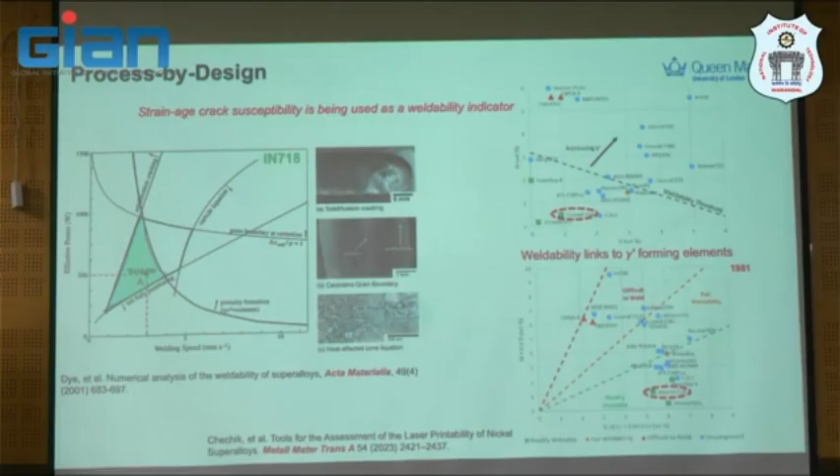But I don't know why people still keep citing this paper, because in welding, you have the parent material. Parent material is a fully homogenized structure when you weld it, right? And then that means that material contains some gamma prime after homogenization. So gamma prime is relevant, but why? This is my speculation and also question: why in AM do people still refer to this diagram, even though we don't have gamma prime at the starting condition?

This is my first question actually, when I was a lot younger, and this inspired me to dig out more. Why? There's no gamma prime. Why do you link this? And this is purely based on empirical study on a particular set of materials at that time.

So again, some other people proposed this diagram again, but they later looked at more combinations of gamma prime plus other phases, trying to say that, okay, again based on experience and observation from experiments or whatsoever, there is some readily weldable material in this zone, but again not completely, because some zones are mixed up with the red and blue dots here. So that's very weldable, don't know what that means exactly, and then difficult to weld, or very difficult to print.

Again, it's also linked to this forming element. If you say, that's why I carefully choose the word, this is weldability. There is no AMability, because again it's about the forming element, not gamma prime per se.

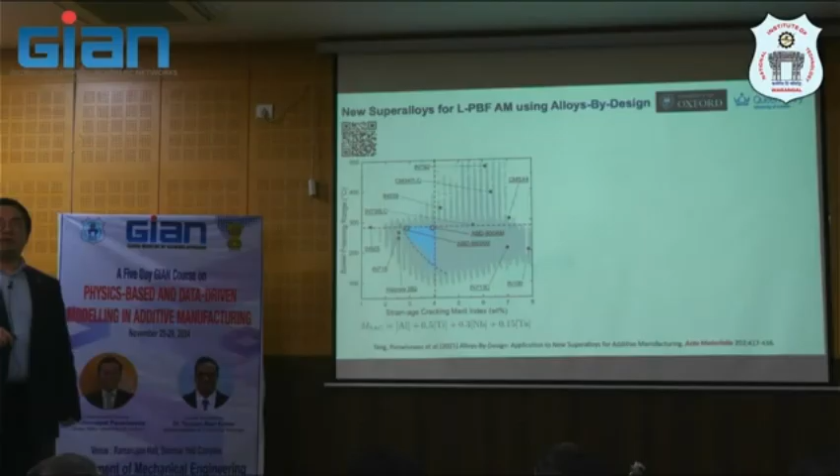If you vary the content of aluminum by 0.01 weight percent, and then another element by 0.01, or keep it constant, vary 0.01, what you will get is about 10 million compositions here in the range of the acceptable nickel-based superalloy, not too much. Because you have a range for each composition already for superalloy, you can get what we call a design space here, looking at the gray dots, and identify the range that you believe is a working condition for additive manufacturing.

And then they kind of draw this line and get the window of the freezing range. As I said before, freezing range should not be 400 like CM247. I mean, this is also 350 as well. We set it below about 300 or 280 something for both compositions, and then we select these two as a function of freezing range, and it's actually not too high in the cracking index.

So one is actually very minimal in crack, based on this index, and another one is a little bit acceptable or at the border. So that's what we call ABD 850.

This material performs well at 850 degrees centigrade and 900 degrees centigrade, so we call it ABD 900. And then we print this one out, and what we've seen previously is that it's actually minimum crack or crack-free in printing condition. You will see that the texture is not very heavily textured material as well.

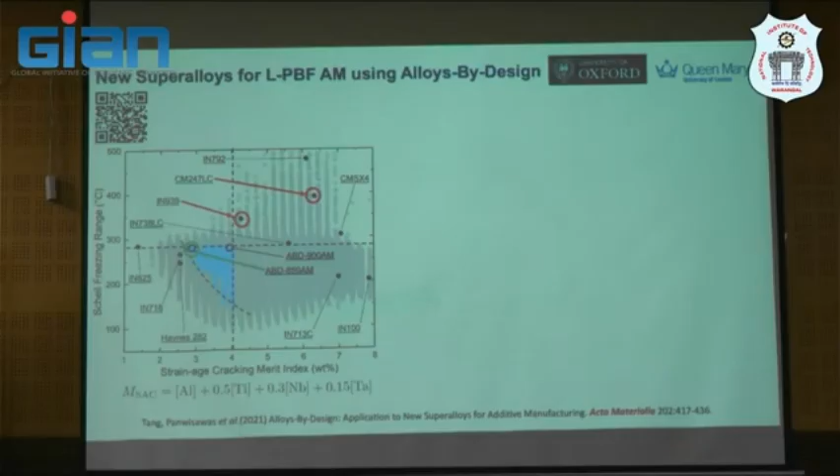Or the paper, the first paper in 2009, talking about a number of empirical equations we use to feed into the alloy design code, and also a thermodynamic calculation in the background. And yeah, this is what we got.

And the question now is why this prints better than this one, why this one prints better than the existing one under the condition investigated. This is the next inspiration.

And this one, actually ABD 900, it's not just speculation that it prints well - we already, not me, but the company, the spin-out company from University of Oxford, previously called Oxmet Technology or Alloy Company, they actually successfully commercialized this ABD 900 and used it in rocket engines to print thin wall structures using a laser powder bed system. It's been tested.

I think it's not actually new, it's quite old, 3-4 years ago. It's there, it's used. And we published right after that, at the same time.

So why is this working, why isn't the previous one working? What is the crack susceptibility? That is the motivation of the work here.

So what we do is try to use a computational framework to link the process, structure, and property relation, especially microstructure, and try to understand why it happens like that. From the aspect of microsegregation, elemental profile, and solute trapping, we believe that may link to the crack susceptibility - that is our hypothesis.

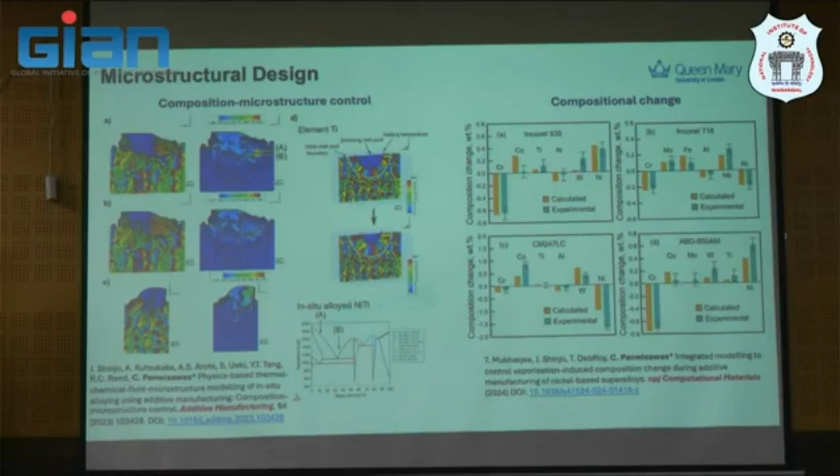So at Queen Mary University of London, in my research group, we have 3 frameworks. We do melt pool simulation, as I said, as you've seen yesterday in the lab session. And then we do solidification, the liquid-solid transition here.

And probably you can implement some solid-solid transformation framework here to understand the phase formation. Again, this is subject to the rapid solidification.

I will give you some examples of two material systems before we go into the main content of superalloy. The first one is titanium 64, which is one of the important materials used for implant applications.

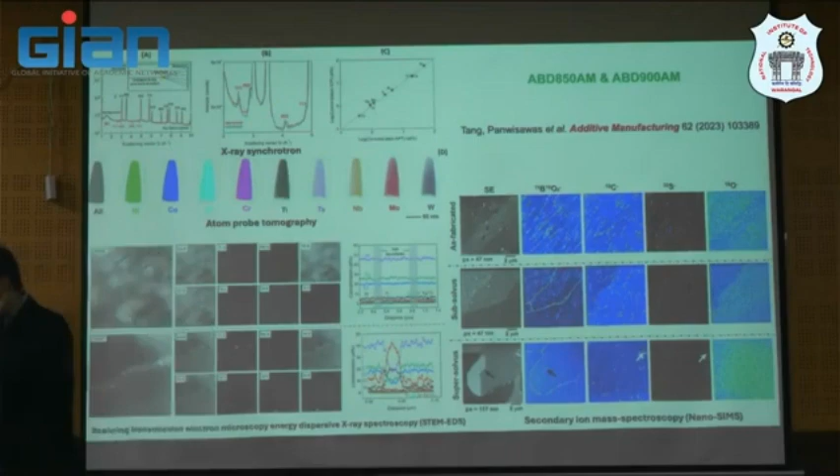So we'll be studying this solute trapping or solute transport in subgrain scale and trying to understand the non-equilibrium during or after rapid solidification. What we do is suspect why the new design superalloy is crack free.

So we try to observe using first X-ray synchrotron diffraction imaging at the light source at Harwell in Oxford, combined with atom probe tomography in as-printed condition, combined with high resolution scanning transmission electron microscope or STEM. Then we do secondary ion mass spectroscopy to understand the oxide at the as-printed condition for these two alloys.

And you will see that there is no gamma prime peak present, detected by high energy light source like synchrotron at all. It's printed as solid solution - actually, you will see here, it's a perfect solid solution material after printing. Atom probe also shows some, I mean there is some segregation, but it's not actually heavy segregation.

If we do post-treatment at different subsolvus or supersolvus temperatures, you can actually segregate out or homogenize some structure. And then this is quite solid solution. If you see the profile here, yeah, there's something across the boundary a little bit. But this is what we got, and we know that this is different from existing alloys.

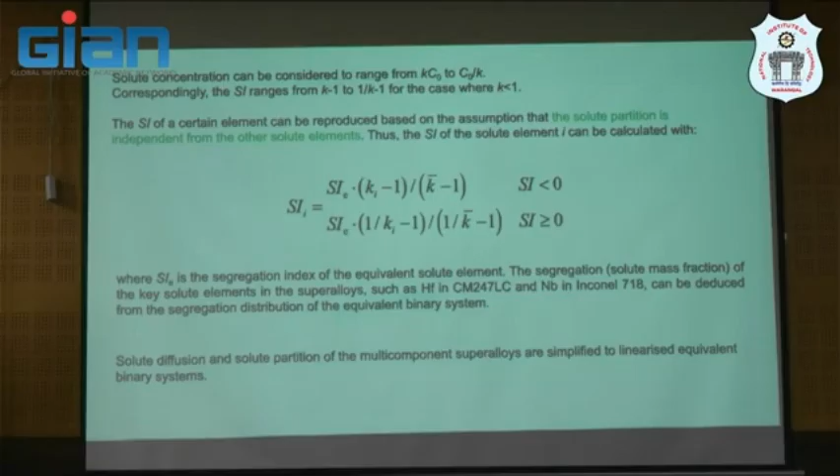The reason we chose these three is because this is the composition studied here. We have a hard-to-print, gamma prime strengthening alloy. We have Inconel 718, supposed to be easy to print, but this is a gamma double prime strengthening alloy. And we have an intermediate gamma prime strengthening alloy designed for AM here, which is a new composition. These are the three materials we are studying.

And then focusing on this one, hafnium. It has only 1.3 weight percent, but instead of niobium, it's 5% here. And this is what we found.

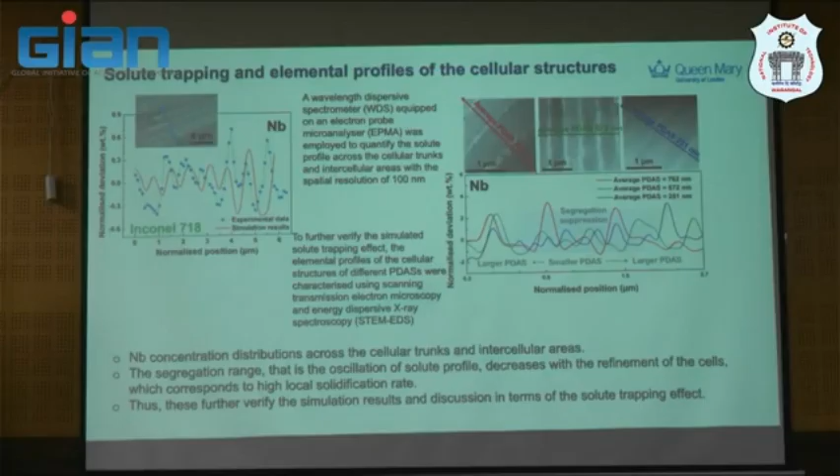So the segregation length here is an oscillation of the solute profile, increased and decreased because of refinement of the cell structure during rapid solidification. And this simulation result has been verified with experiment in terms of solute trapping, so we can approximately capture the effect.

This is planar growth because we're talking about high cooling rate, right? Planar and cellular structure will form, and after that, once this progresses, the solute enriched zone actually goes up and leaves behind the solute dilute zone. And after that, due to the fluid flow as well, the cross structure will form, giving this severe segregation profile here.

After that, once another heat is put in - this was the first track - the second one, in the overlap zone, the heat input here will push away this solute because it will be remelted again. This zone has been remelted, and then there is sufficient solute mixing - it's mixed together - and this leaves behind solute dilute areas, so there is no heavy segregation at this point.

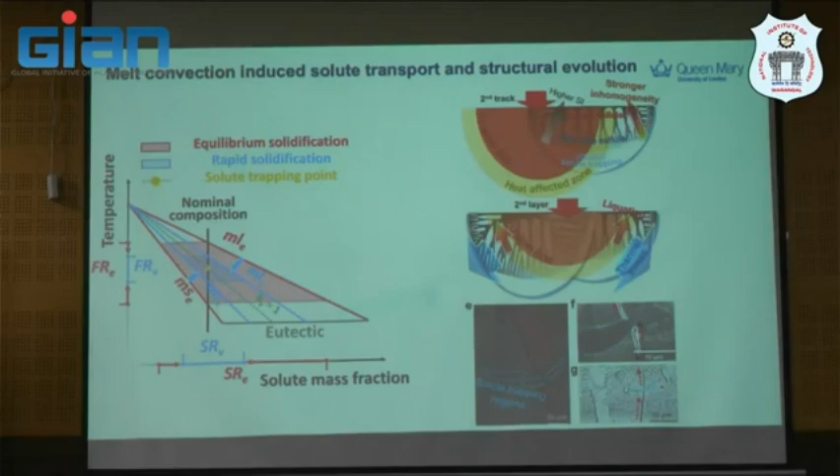I think if you go back to your sample, I bet you will see this kind of thing as well. Most of the time, that's what we observe across the sample. It's not speculation, but I think there's something to do with the process.

So we try to relate this now. So what is the use of this? At the end of the day, I ask myself, what is the use of this one? Actually, when we know the hafnium profile here, you'll see a highly segregated profile compared with 718, which has a quite good segregation profile, but still some segregation.

This is a zone that you see, which we call the solute dilute zone, right? It's trapped in the melt pool, and this is due to, we believe, the effect of melt convection during the printing, which makes it, let's say...

If you decrease the cooling rate here, let's say this is the solid liquid interface, and once you have the convection flow, this will actually increase this zone. So convection will suppress this, but strong flow will go up here, and this solute trapping induced suppression will...

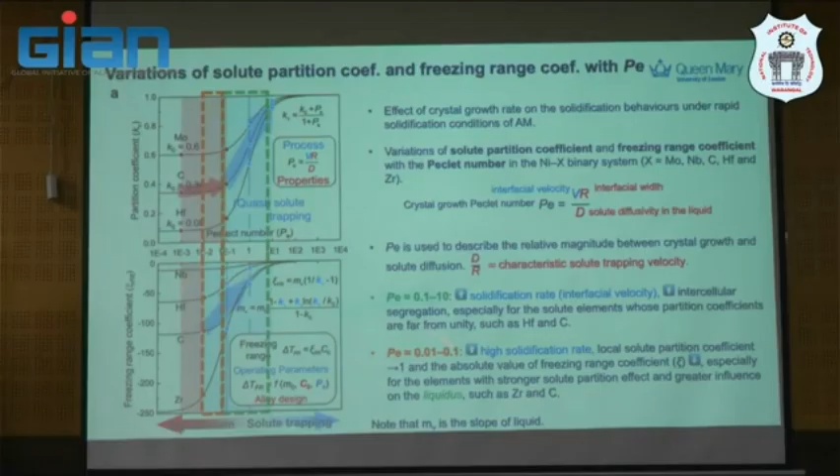And if you're talking about near equilibrium, with high solidification rate as well, if you are in this zone, it's still trapping. Your freezing length will change, so it will be decreasing, such as the solute profile that contributes to this, like zirconium and carbon.

So what this means is that the process parameter is so important, as we know in CM247 LC. If you change your hatch spacing, power, or energy, you will get different crack density, based on the previous study in LPBF. You will see if you use lower density, your linear energy density even higher, but your crack occurrence is actually lower. But in the case of CM486, it just shows similar composition.

And this one contributes to the energy density that contributes to the interfacial velocity we talked about previously. This is a suggestion: the influence of common elements in superalloy on crack susceptibility. This can be found in the Nature Communications paper if you'd like to look online. So the freezing length here will vary as well, based on the process parameter you use.

Surprisingly, that means we cannot control it like casting. We know the freezing length, so it's a dynamic process.

Second, segregation length. If you see the yellow exclamation mark dot here, that means the composition that we need to take care of a little bit more in terms of solute trapping, because hafnium, zirconium, and carbon actually contribute to the crack susceptibility as well. The graph to solute trapping here, so this one is okay. Freezing length, hafnium also contributes to segregation length and also freezing length.

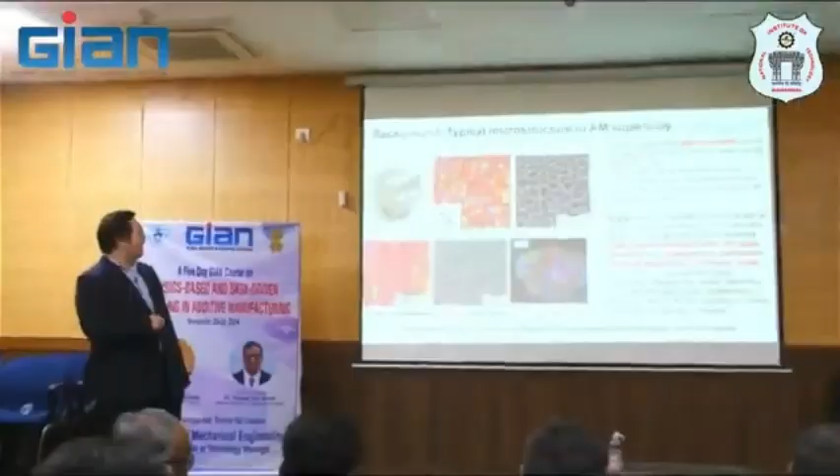Okay, I know which one this is. Yeah, this is the previous one, where the micrographs are showing reduced cracks, no cracks in the new alloy, compared to cracking in Inconel 718.

I think that's here. Yes, sir, here. So the micrographs are showing hot cracking, and the index is strain age cracking. No, be careful. I already said there are so many crack mechanisms actually acting here. You can see more in this ACTA paper about how many crack mechanisms operate. But what is your question?

So in the micrographs, are they solidification cracking? In the micrographs, it's a mixture, no—it could be ductility dip, liquation, lack of fusion. The crack here is hard to identify because based on imaging, we classify any line in the microstructure as a crack. We haven't classified it yet because this is image-based analysis, not like tomography where we can identify the feature like in the previous work. That makes sense—this is just about MSc, PhD level work.

This is the same one I showed in the previous talk, just as inspiration. Be careful, this is just a way to quantify the defect content in the printing—we call this crack susceptibility. We call all these crack, but this feature may include liquation, solidification, and even porosity, because once we apply different contrast to the image, this will bring it up.

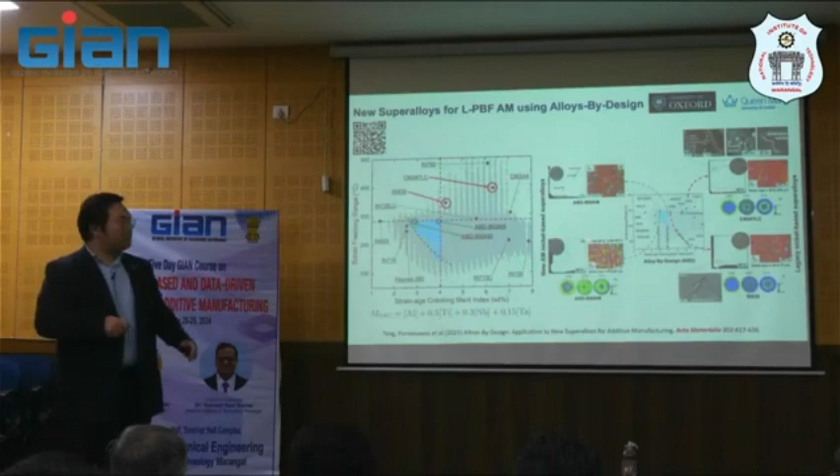We will not remove any feature, but that means you need a criteria to remove it. We haven't implemented anything yet, because how can we make sure we select the right one? Defects in this vicinity will be captured and then analyzed.

If you remember my last talk, you saw the distribution. The smaller parts are probably related to some defect, while the bigger, lengthier ones may be cracks. I don't know for sure, but this is something we need to analyze further.

Does this make sense? Those cracks will not be SAC cracks because the samples are as-fabricated. There cannot be strain age cracks.

Correct, sir, but if your print is quite high, at the bottom you have intrinsic heat treatment. But no gamma prime was reported. That's why I mentioned this has to be improved in the alloy design—they made the assumption it's the same as having gamma prime, but actually no. This was the best assumption at that time, back in 2015, 16, when they first did it.

The understanding I'll show you later wasn't available yet, so you need to consider the timeline as well. This is a huge amount of data and effort, because it's based on the alloy design in the disc and turbine blade.

I know what you mean, but that's why I said no gamma prime matters here. Anyway, this was the best approximation at that time—a model is just a representation of reality. We cannot expect 100% accuracy, but we need to use it with caution and know the conditions under which it's working.

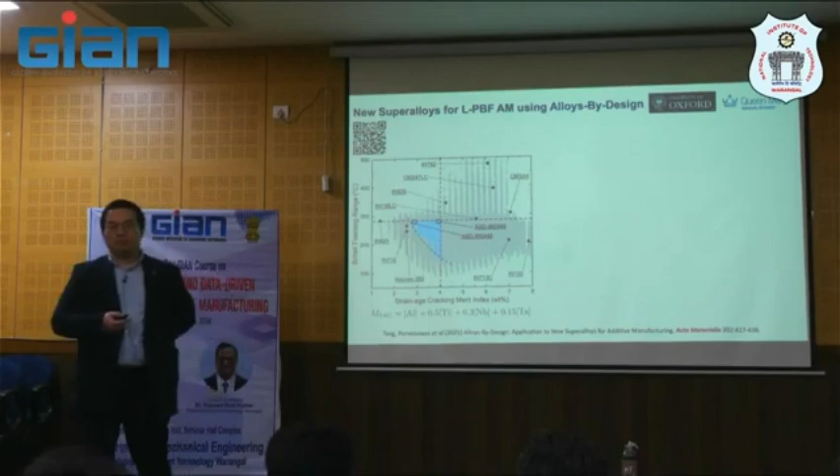Sir, I have one more question. Let's say I print a big turbine blade, from top to bottom the segregation profile will vary—say more segregation at the top, less at the bottom, or the other way around. How do we go about the heat treatment procedure, to ensure the part throughout is homogenized and precipitation volume fraction is uniform from top to bottom?

Since there are so many things to do, it's not about heat treatment only—it's about the way you fabricate it as well. You cannot expect something highly segregated at the bottom and then homogenize throughout, maybe 30 to 50 millimeters up. In my opinion, you need to change your printing strategy, like the scanning pattern, to try to control and get a better thermal signal that can homogenize the structure as printed.

That's why digital twin may play a big role in this kind of research—we need to collect data on time, on the fly, not only afterward. It has to be during the process as well. If you have heterogeneity across the sample, it's probably an easy fix with heat treatment, but if it's highly concentrated, I don't know—the best way might just be to remove the base.